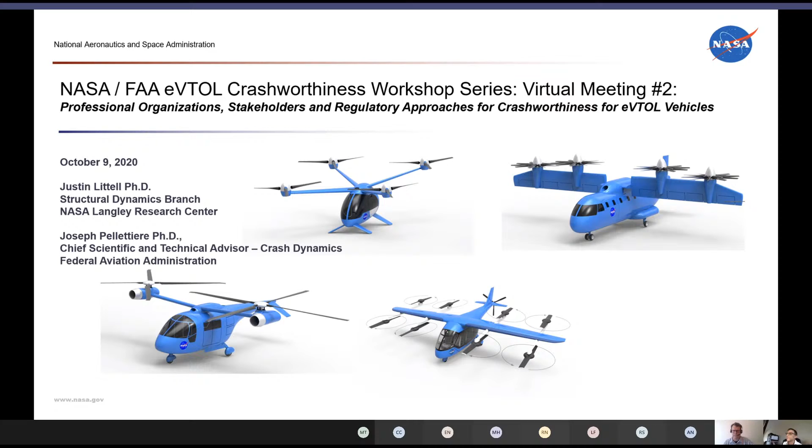As I mentioned, this is the second in a series of workshops. The first one, back in April, provided some of the historical basis for crashworthiness and some of the overall regulatory considerations we were looking at. This installment will review crashworthiness from the perspective of professional organizations and stakeholders, and also provide information on the regulatory approaches as they pertain to certification efforts with regard to crashworthiness for both the FAA and EASA.

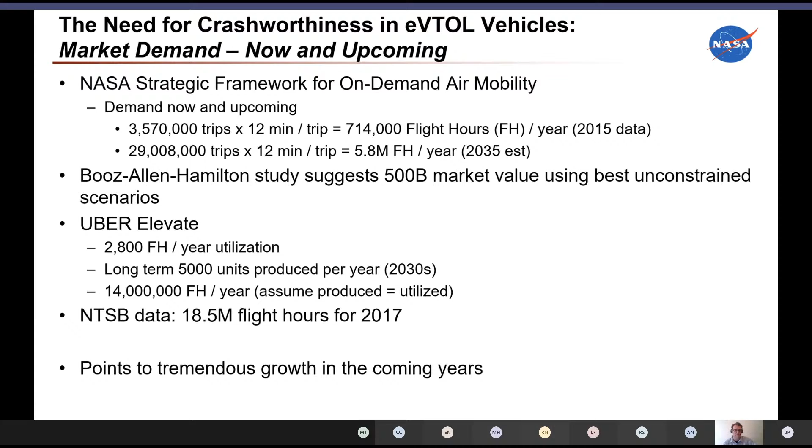And then using some equivalent transport aircraft data, there's 18.5 million flight hours for 2017. So all this boils down to the fact that there's tremendous growth in these vehicles in the upcoming years, and we're just at the start of it.

And then finally, I want to talk about public perception. This is a study that NASA Crown Consulting conducted for NASA. Basically, it boils down to the fact that there are 5 major concerns, and safety is one of those 5. There's a text that says consumers cite proven safety records and demonstration as factors that would most increase their level of comfort. So knowing the performance of these vehicles under normal operations and also emergency operations is very high on the consumer focus here.

So there's 3 strategies that Crown suggests for public acceptance. One is technology, so establish the safety standards, focus on noise, which is not our topic today, but safety systems is. Unified messaging, that's addressing public concerns and emphasizing benefits, and then proactive engagement with concerned groups. So these bottom 2 are a little bit of what we're trying to reach out today and focus on.

And then finally, I'll just show an example, a more recent example. This was presented at the VFS Forum actually this year. This is the NASA Lift Plus Cruise concept vehicle. There's 2 configurations of it. One is sort of a baseline non-energy absorbing configuration.

What we found is we have an occupant model in there. We ran a 30 foot per second vertical case, just like the drop test I showed above.

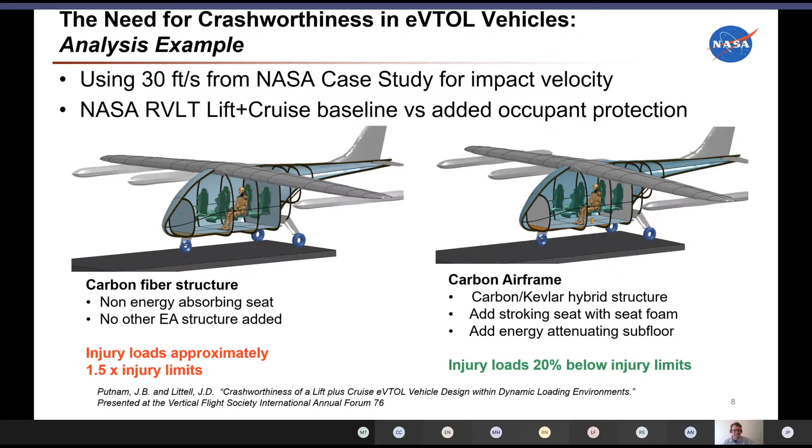So a very quick overview of why we're doing this today. Joseph, back to you.

Thank you, Justin. So a question that comes up is, in crashworthiness, why now? What I'd like to say is that a lot of these vehicles, we're projecting forward, so they're early in the development cycle. If you can get on the ground floor and start incorporating crashworthiness features, energy absorption, the space, the technologies that are needed, that will pay great dividends in the future because these airframes are likely to remain around for a long time.

The other thing is, as Justin was showing, when you look out in the future at the number of flight hours that are projected, you could go from that and say we're going to have some emergency landings, some incidents and things of that nature. So we have to expect that there are going to be some sort of outcomes that we're going to need to protect the occupants from to ensure continued growth and acceptance.

It also hits one of the Crown features, which is getting the safety message out there, getting the public perception that these are safe vehicles, that they can maintain safe passage from point A to point B to ensure that continued growth.

The other aspect is right now the current regulatory framework is really based upon other designs. So we've borrowed the framework from other classes of aircraft, and we've had to sort of modify and mold them in place in order to kind of achieve the project basis and move forward now. As we begin to learn more about how they operate, the failure modes and things of that nature, we may have to change and modify some of those regulations and means of compliance.

So as mentioned, we're an international professional society working to advance vertical flight, founded in 1943 as the American Helicopter Society, but our mission has always been all kinds of vertical flight aircraft around the world, manned, unmanned, everything. We're an educational nonprofit, so our whole purpose is education and expanding our knowledge and providing resources for developers in industry, academia, and government, and moving forward to realize these advancements, not just in technology, but in adoption as well.

We're a membership society, so everyone in industry, academia, and government is eligible to join VFS. As mentioned, we were originally founded as the American Helicopter Society during World War II, when most development was in high-speed, long-range fighters and bombers, while this technology could barely get a person, maybe 2 people, off the ground, very limited in payload, range, and endurance. But the people developing the technologies, industry, academia, and government, needed to come together to help support this advancement.

Similarly, we saw this coming in the 2013 timeframe. We held the world's first workshop on eVTOL. You can see some of the leaders today in eVTOL were at that first group. We found a room that held 100, and we sold out pretty quickly. And we've been working ever since to try and lead and collaborate in advanced eVTOL technology.

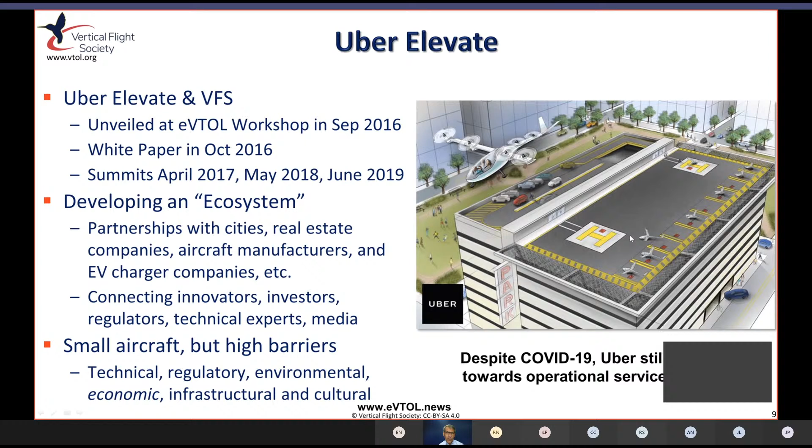Uber was planning to do some demonstrations, air taxi demonstrations later this year. I'm not sure that they're still on track for that, but they are saying they are still on track for certification and operational service in 2023. So we know when the eVTOL revolution is going to happen. We need to do everything we can to help realize this great future that we see.

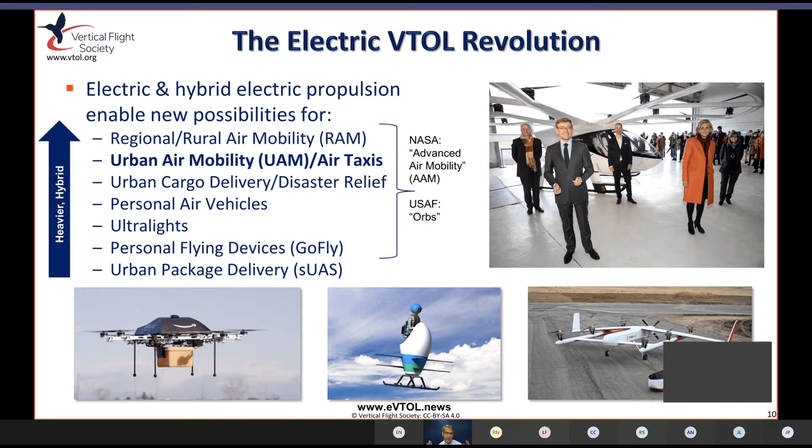I mentioned urban air mobility. That's just one slice of it. There's a whole range from package delivery, personal flying devices, cargo, larger cargo, and then urban air mobility and air taxis. There's also regional or rural air mobility. All of these are now grouped under this broader term of advanced air mobility, or the Air Force had to come up with their own term, for Agility Prime, they're calling them ORBs, but not a really great definition. And yesterday, one of the representatives from NRC Canada, National Research Council of Canada, said they've actually got IAM, integrated air mobility. So we need more acronyms I guess, but let's just look at the technology, which is the eVTOL.

And it's important to understand this isn't just electric helicopters. Helicopters are phenomenal at hovering, and with a very large disk area they're well suited to hovering. But when you want to take that horizontally rotating rotor and translate it for forward flight, that requires a lot of mechanical claptrap and a fair amount of complexity, which is cost, weight, and maintenance requirements.

But that didn't eliminate the complexity of the rotor system, and that's really the key way to get some of the advantage - to replace this costly, expensive, complex single rotor system with multiple simple thrusters. So most eVTOL aircraft use propellers. Sometimes they call them rotors, like multi-rotors, but they're not rotors, they're propellers, fixed pitch propellers. They can get off the ground and then get on a wing for efficiency. So a large diameter rotor or propulsor thruster is going to be most efficient for hover. They sacrifice that by having smaller diameter propellers, but then get on a wing for best efficiency.

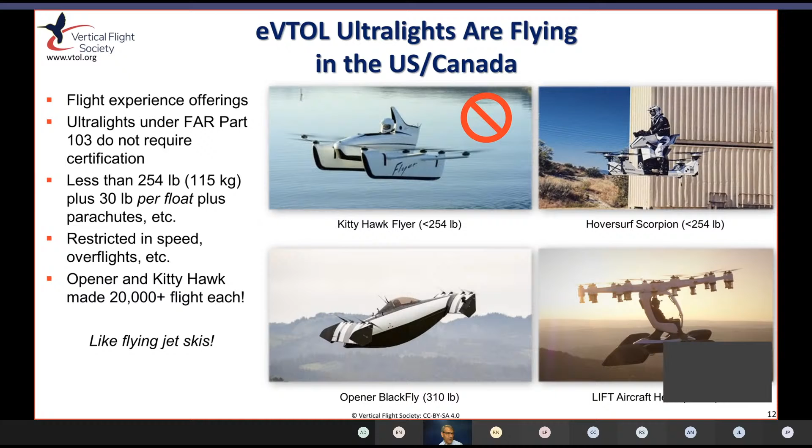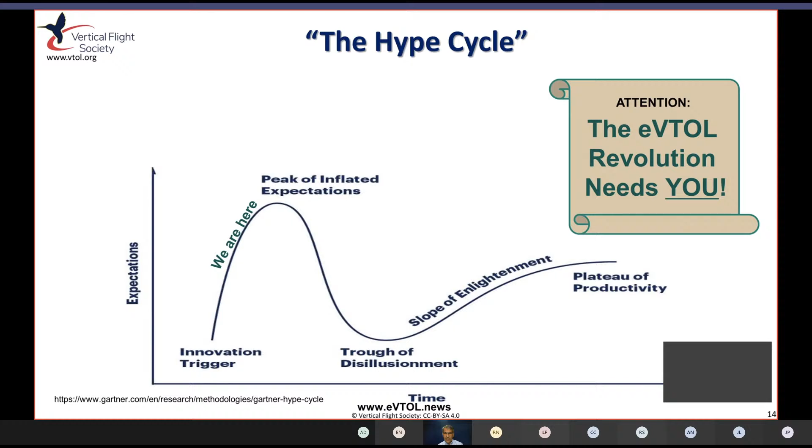So eVTOL aircraft are flying, but part of that - the fact that you can take a relatively small aircraft, put some electric motors and batteries on there, and get it off the ground - has really led to this what's called the Gartner hype cycle, where there's this huge peak, this hype. People are almost hysterical about the potential for eVTOL, and we're still going up this peak of inflated expectations. But now we've been trying to get people to understand that it's much more difficult to develop an aircraft than just putting motors on it. There's the safety, there's operational range, there's all kinds of requirements or considerations people need to remember. And so we're trying to inform everybody, trying to educate everybody and bring everybody together so they can solve a lot of these problems.

Well, you have to understand where we are in the development. Otto Lilienthal said to invent an aircraft isn't really anything. To build one is something, but to make it fly is everything. But it's easy to design an aircraft if you don't know how. The most important thing is to actually come to an aircraft that's in production and operation and is making money or meeting the needs of the user.

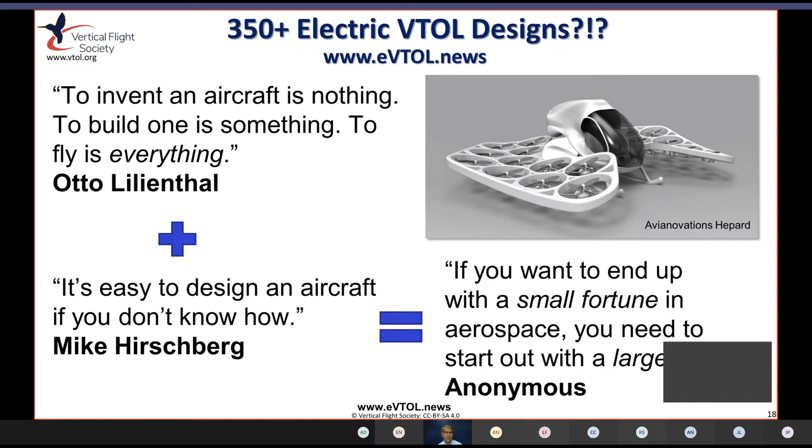People know it's a maxim of the aerospace industry that if you want to end up with a small fortune, you need to start out with a large fortune. Luckily, with the dot-com boom and other things, there has been a lot of money available for venture capital and ventures.

But ultimately, it'll be successful if you can make money with these aircraft, both in sales and operations. So low direct operating costs and seat mile costs is really the key result that you want to have.

I mentioned before, noise is a key enabler. So with eVTOL aircraft, there's real potential for a step change in utilization through cost, noise, emissions, and other factors. So where are we today?

If you're coming from the helicopter world and know some of the history, it was a long time after people got off the ground before the helicopter was actually able to do something useful, in the 1930s. They had some limited abilities in the 30s, but really the 40s and 50s, and maybe in the 1960s or so, they were really pretty useful, especially with the first turbine engine helicopters.

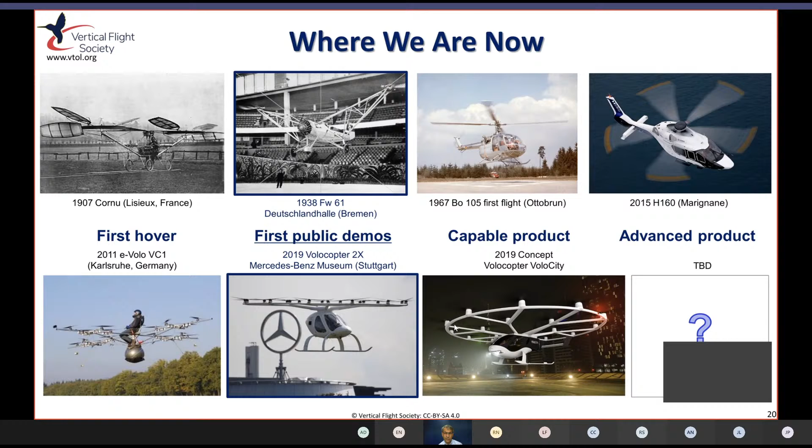So we see 5 key challenges for eVTOL aircraft for urban air mobility operations. Batteries, motors, the actual technology for the larger sizes here of 4 passengers plus a pilot, that's kind of at the ragged edge of what technology is able to do today, and also still keep the noise down.

The infrastructure needs to be developed. Luckily, or thankfully, NASA and FAA have been working on the air traffic management solutions for UAVs and UAM. So UTM systems are being developed, which will be able to handle thousands of aircraft. Still a long way to go, but work is underway.

There's a physical infrastructure. You see here a Skyport concept for Uber Elevate that Gannett Fleming, one of our members, developed. So there's all kinds of different ways or visions for the best way to maximize throughput, and that means more benefit for us as consumers, that we'll be able to take air taxis when and where we need it and get there faster than if we had to take another available means of transportation.

Standards and regulations are key. These are in development, and that's a little bit of what we're talking about today with the other organizations. I'll touch on that a little bit more in a minute.

And again, safety, noise, not-in-my-backyard concerns, even if they're really quiet, there's air pollution or visual pollution of hundreds of aircraft taking off over my house or past my apartment. That's also something to consider. And if it's seen as a benefit where anybody can take it, not just something for the rich, then that'll help with public acceptance.

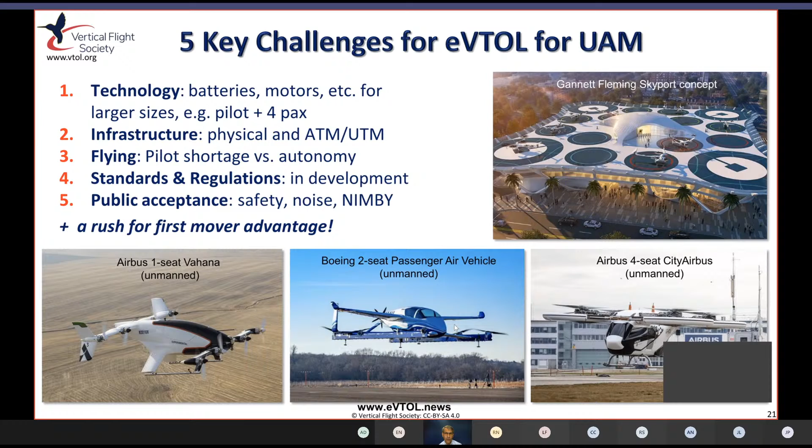Of course, we know that all these challenges could be solved with enough time and resources, but there is a rush, I'll say a rush. There is a push for first mover advantage, to be able to get the best return on investment for the development of these aircraft and development of the whole ecosystem.

So crashworthiness - NASA has a couple projects. There's the Revolutionary Vertical Lift Technology project, which used to be the rotorcraft project, that's really pivoted now to better support eVTOL and UAM. It's focused primarily on vehicle technology, so CFD and understanding the technologies for the aircraft. The Advanced Air Mobility project is working more on the operational challenges - that's roughly where they are.

It's important to realize that airplanes crash horizontally, while VTOL aircraft like rotorcraft crash vertically. Look at some of the designs - these are just notional designs Uber came up with - but they're most likely to be unitized composite structures with lots of battery mass and distributed electric motor masses. Nothing like this has really flown before.

On the bottom right, it shows the first testing that NASA, the Army, and industry did of composite rotorcraft, back in the late 70s or early 80s. This was a new type of vehicle, and it needed to be tested so people could understand how to enable those.

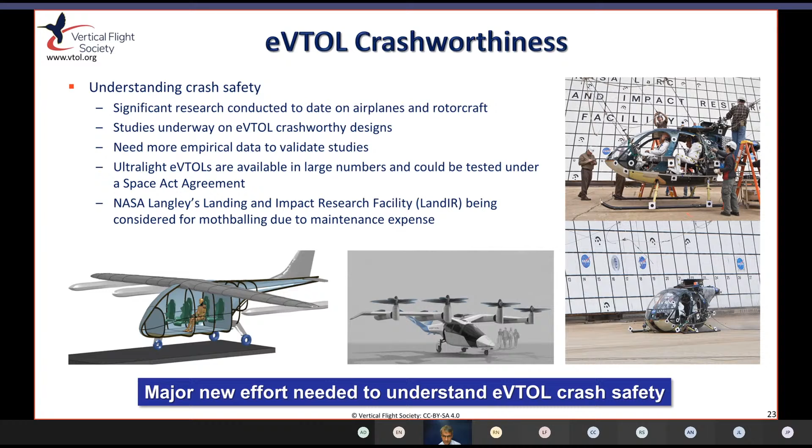So this session today is talking about professional societies. We started something over a year ago now called the Air Mobility Council - we brought together 10 or 12 different organizations. It's just an informal discussion group really, to try and coordinate and collaborate, also working with standards development organizations like ASTM International and SAE International. We need the technical experts, the developers, to get involved with GAMA, with these different associations, with the standards development organizations, to figure out what the requirements are and what the certification and standards should be.

In our discussion yesterday, Mark Moore from Uber said if there's one thing he could do to get the professionals involved more, it's to work with the standards development organizations and the associations to develop these standards. We need you, the industry, and academia, and everyone to get together to advance this.

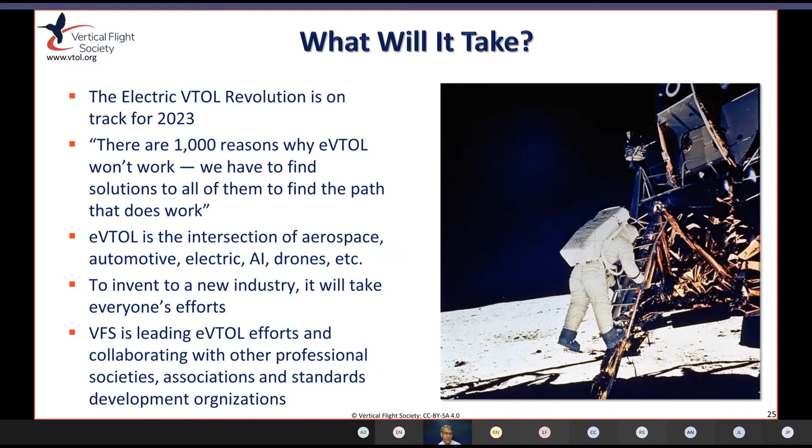So in summary, the eVTOL revolution we think is on track for 2023. I've been saying for a long time there's 1,000 reasons why eVTOL won't work. We have to find solutions to all of them to find the path that does work to realize this vision of air mobility that we think is possible, and it's coming. Just a matter of when, not if. But we can accelerate it and have a much smoother transition if we all work together. So we all need to work and try to invent this new industry.

They've heard the expression it takes a village. Well, it takes a lot more than that. It's going to take society. It's going to take everybody from all walks of life around the world. It's going to take your help in making that happen.

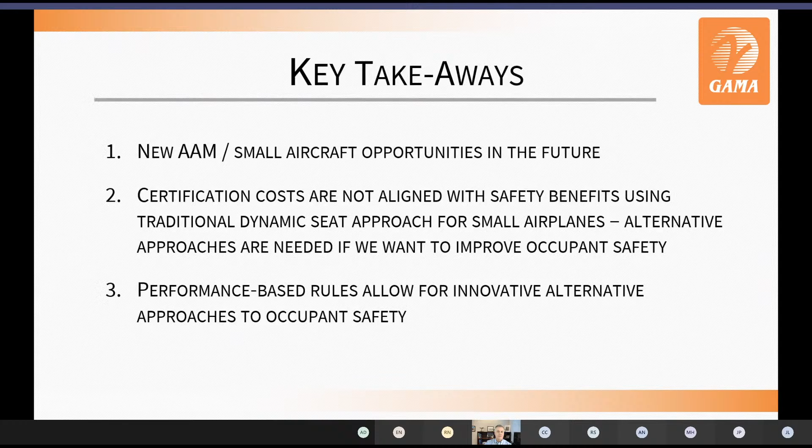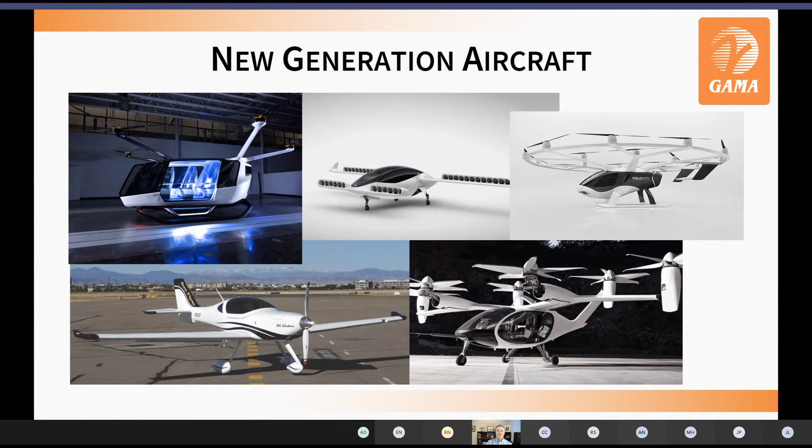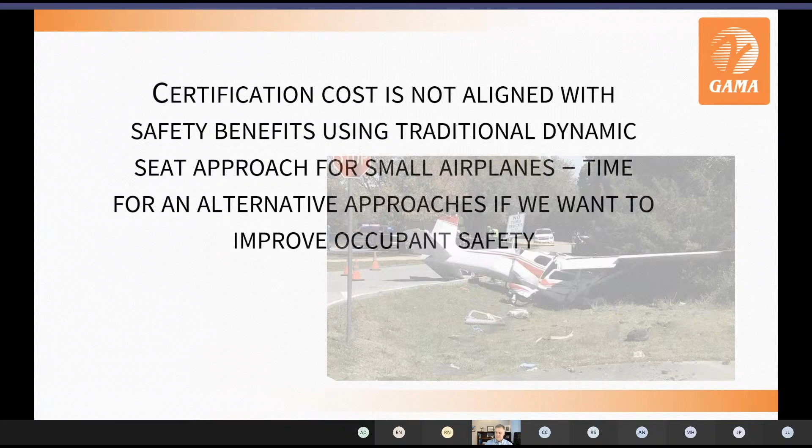So moving on, let's talk a little bit about certification cost and how it doesn't really align well with the safety benefits when we're talking about the traditional dynamic seat approach, and the need for thinking a little bit broader and more innovative and looking at alternative approaches if we really want to improve occupant safety, which we do. If you look in the background, this accident kind of sums up one of the big problems with small aircraft, in that they just don't have the consistency in terms of accidents that we see in larger aircraft. The NASA testing is wonderful, but it doesn't capture all the problems, and I'll talk about that in a bit. I think there is some weight, inertia break point where below it, we could say 4,000 pounds, just kind of as something to wrap your head around.

When we talk about accident scenarios, you look at biz jets, transports, helicopters, they tend to be fairly consistent. As you get smaller, especially with single engine vehicles, you don't see the consistency in the accident scenarios. And the reason that's important, when we talk low weight inertia, light wing loadings, light disc loadings, the very specific dynamic testing scenarios don't line up with the accident service history. I would project that eVTOL aircraft may have the same variation in accidents, maybe a little less, because they have, or they're going to have, more redundancy with the propulsion systems, which is excellent, but they may be operating over more challenging environments and more challenging weather conditions.

So one of the reasons that I bring up dynamic seats is because it's the most expensive component in a small airplane today, next to the engine and avionics. Years ago, when I was at Mooney, that seat and passing the test cost more than an entire STC for a new engine, new gross weight, expanded fuel tanks, new instrument panel, better performance. I mean, it was a substantial STC, and the seat cost more than the rest of the whole entire STC. It's something that we really have to have a conversation about.

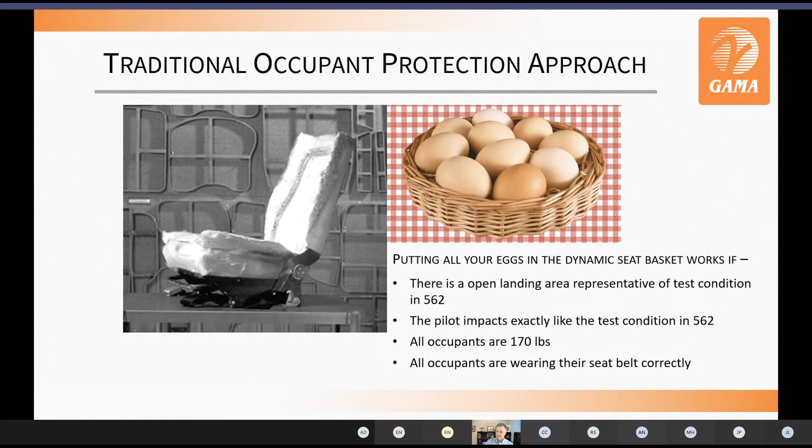So before we move on, I would just like to point out that whole thing about putting all your eggs in one basket. If that is a very expensive test, it kind of drives our manufacturers to where they're going to be reluctant to look at doing additional safety things for no credit, because that's extra cost and weight. So we have to figure out how to spread that out.

So it goes beyond a typical rule, very, very precise, and that drives cost. So when I talk about performance-based rules, that's kind of a top-level flexibility that's allowed in 23-64. These are the new emergency conditions, as we call them. You'll notice that this doesn't tell you how to design and test the seat, what it does is it defines the intended safety outcome. And that's the intent. Now maybe you can get to this intended safety outcome in a lot of different ways, probably leveraging off the dynamic seat concept, but maybe now you're allowed to get credit for doing some other things that could really enhance occupant protection.

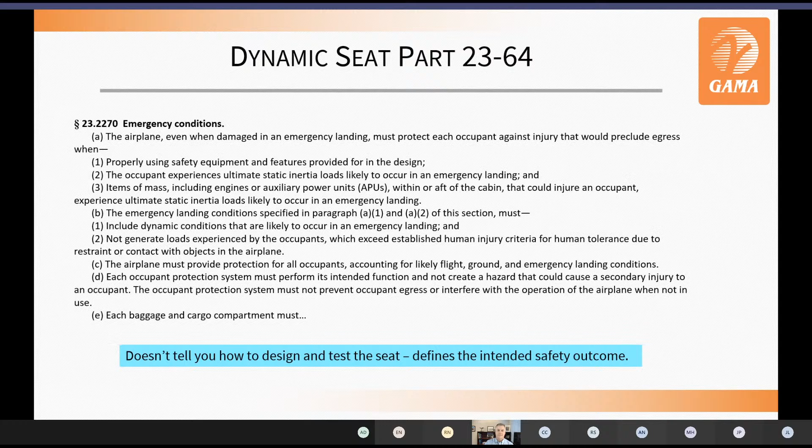So what's that available on? Obviously CS23 and Part 23, but I would also offer that EASA's eVTOL, which leveraged CS23, has the same language and leverages that. I think they bias it towards Part 27. The FAA is taking the same path for these vehicles with Part 23, and I think they're using very similar language, if not the same language.

Fortunately, we're not locked in to those prescriptive requirements anymore, but applicants are going to have to propose this. I'm hoping that the authorities will work with our industry and kind of come up with some credit for doing different things, maybe look at modeling, more credit for modeling, and a mix of tests and that.

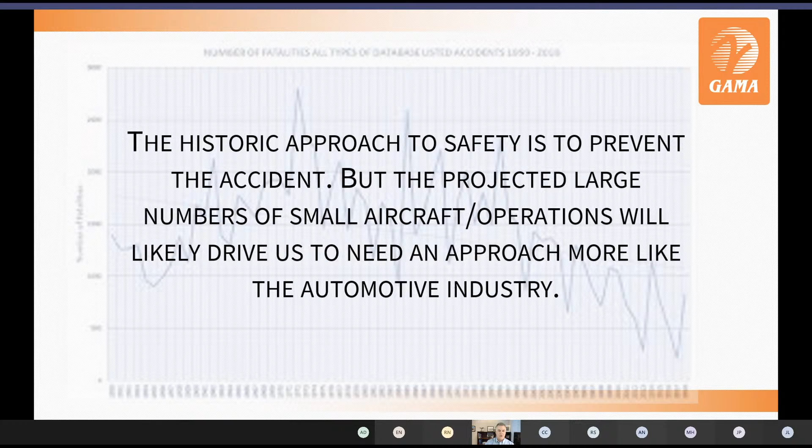That said, as Justin showed you in the first set of slides, the numbers of aircraft and the numbers of operations we're talking about pretty much ensure that we're going to have accidents. There's just no way around it. History says it'll happen. So how do we address that and keep the public interested for this urban air market that we're really excited about? I'd offer that maybe we need to start thinking more about this from an automotive standpoint, meaning accounting for the fact that accident scenarios will have a lot of variation.

Since it's unrealistic to count on just preventing the accident, what we need to do is accept and expect that we will have some. And the key point I really want to highlight is that we need to start thinking about this more from the automotive industry, where the goal is to protect the occupant and allow them to walk away from accidents. People aren't afraid of driving anymore because there are so many accidents that might have been fatal a decade or two ago where people just shake it off and walk away.

Furthermore, you look at what folks like Simpson Racing have done for Formula One and NASCAR, and the accidents that the drivers are walking away from. It's just phenomenal, the technology that's out there today for occupant protection. And while we recognize there are weight issues, and in F1 there are just what they wear, and other issues with racing that aren't practical for us, I think some of the technology and concepts are things that we can use.

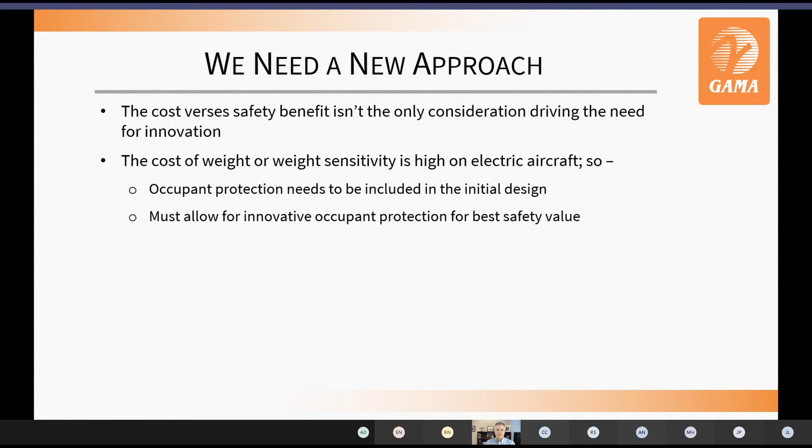Just from a practical standpoint, one way to address that is to try to build this stuff in during the initial design phase. And with that comes early discussion with the authorities so manufacturers know they're going to get credit. We have to all be on the same page when we're going down the path. The second point is that when you're doing something innovative, it needs to balance out with that safety value, and I want to share a few practical considerations.

We're talking about moving a lot of people through fast because the target is urban air, like an air taxi. That's probably where we're going to see most of this. Advanced air mobility excites me for some of the long runs, but the short hops will happen fast.

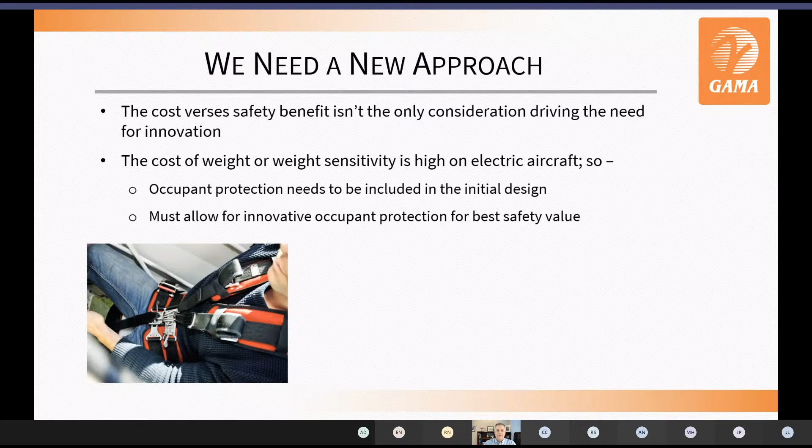One of the aircraft I fly is aerobatic, and because of that I have a harness like this. It's an awesome harness, and I feel like if I hit the ground and the steel roll cage holds, that harness is going to keep me alive, and I'm not going anywhere. The trouble is I have to plan about 5 minutes to get into that thing. Moreover, if I take anybody flying in it, I literally have to do the seatbelt for them because it's too complex.

The other aircraft I fly has a traditional car seatbelt with an inflatable restraint or an airbag. This one is awesome in the sense that people can get in, they know how to do it, it's very easy, and they're very comfortable with it, used to it. The downside is it may not give you the protection you need in a weird accident. There's nothing to keep you from submarining under that, for example.

And now for a little bit of technical humor. In the US, we have an amusement park in Ohio called Cedar Point. It's one of the best roller coaster parks in the country. I love going there. While I'm standing in line watching people who don't know anything about the ride, don't have any experience technically, get on, pull that thing down, go upside down, and then they're off. They're moving people through so fast.

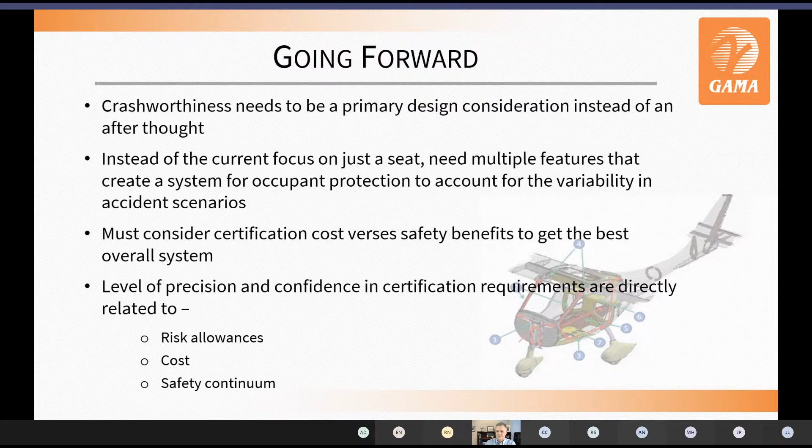So that's all I have, Justin. I'll turn it back to you.

Thanks, Lowell. Yeah, great presentation here. There are a handful of questions on the Conference.io app, and I'm going to go through a few of them. The first, and I think you've touched on it already, is: what do you think are the most important features for eVTOL companies to incorporate in their aircraft? And the sense I was getting from your presentation is all of them, but I'll let you comment further.

So I think when you say all of them, you're pretty close. Most likely, you're going to see more vertical impacts. So I don't want to discount the energy absorbing seat, but I can really envision other types of impacts where you may hit something. And that's what we see today, right? Rollovers, side impacts. That's where you may be able to leverage airbags.

I know if I ball up my car, the whole thing becomes a cocoon of airbags. Now that's probably, from a weight standpoint, impractical, but maybe there's something a little milder you could consider. A better harness system, something people are willing to put on. I mean, those three things are going to get a lot, 90%. There are a few other features from the racing car industry you might look at.

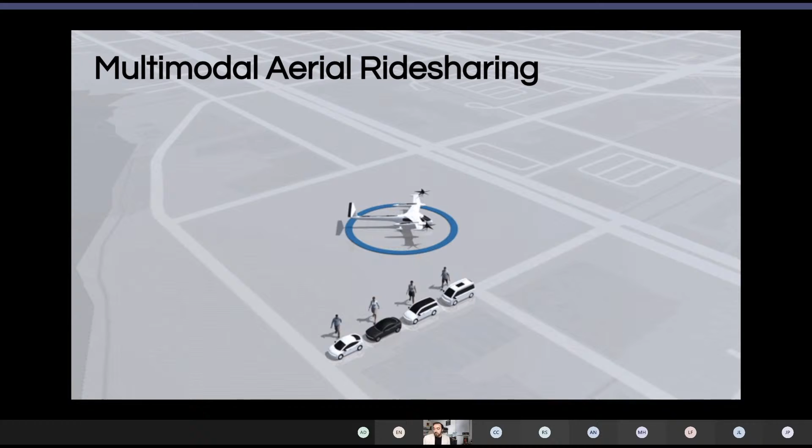So I'm going to go to what is Uber Elevate. Uber Air will be an on-demand aerial ride-sharing service. On-demand means that a ride request can be made in real time without prior booking. The Uber Air concept and technology that enables this on-demand service will be leveraged from Uber's ground mobility services. The term aerial ride sharing means that each Uber Air ride will be shared or pooled at the origin of the flight leg. There's 5 major steps to a multimodal aerial ride sharing experience.

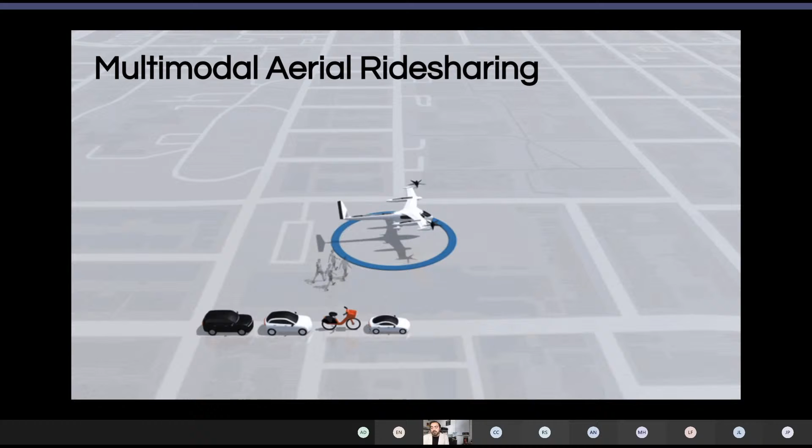We have the first mile, so this will be either in UberX, perhaps a new mobility solution like a shared bicycle or scooter, origin skyport operation, the flight segment, the destination skyport operation, and then the last mile. You're seeing these segments displayed for you on the screen.

As you may know, our rider analytics and simulation tools really provide Uber Elevate a unique ability to provide deep insight into how people move throughout cities. And as a result, we're able to set appropriate vehicle requirements for vehicles operating on our network.

As you see on your screen, this means we need an aircraft that can fly at 150 miles an hour, with 4 passengers and 1 pilot in terms of payload, as well as their associated baggage. A range of 60 miles at least at maximum range, but a typical mission may be around 25 miles. They need to be quiet, at least 15 decibels below stage 3 limits for existing aircraft.

And they need to be electric. We really believe that, in terms of zero emission and minimum infrastructure requirements, we really don't want to be managing fuel. We really think that all-electric eVTOL aircraft are the right solution for this mission. We think these aircraft are going to fly a lot, and they need to be reliable, and need to be able to complete somewhere around 2,000 flight hours a year.

Today, Uber has 8 OEM partners developing eVTOL aircraft for our aerial ride-sharing mission. All aircraft that meet our operational specifications have a wing, and will, throughout most of their operational flight time, be under wing-borne lift, like a GA aircraft. In many ways, it's often more appropriate to consider these normal category airplanes with a VTOL capability. As Joby recently described their aircraft in Aviation Week, it's more akin to a high-efficiency glider in cruise.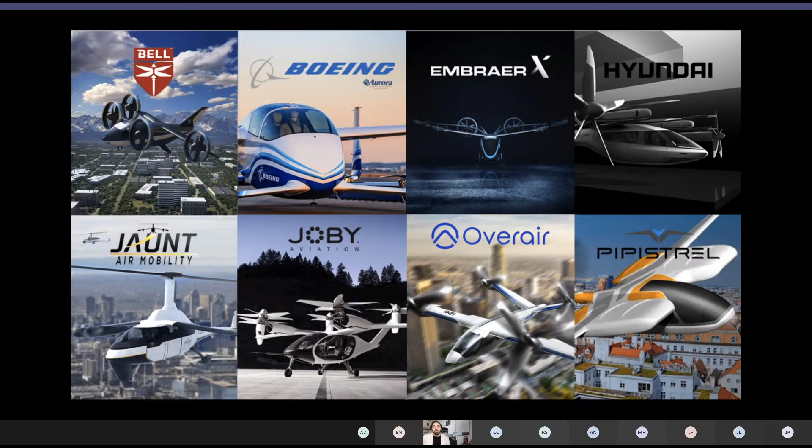Wing-borne features and crashworthiness are somewhat well understood and well documented in AGATE studies, NASA and FAA technical reports. So today I really want to contextualize the VTOL takeoff and landing environment, which perhaps is going to be unique for these vehicles.

When we talk about crashworthiness, it's going to be critical to contextualize the vehicle and its expected operational environment. Uber is in a unique position to help inform infrastructure design standards and other aspects of the system necessary to support these new technologies through our ongoing collaborative research and development work with our OEM partners, FAA, NASA, and others.

With infrastructure, we anticipate that existing airport and heliport design standards may be adequate for many eVTOL operations, supplemented as appropriate with engineering briefs or other interim guidance to support modifications for supporting systems necessary for battery charging, stationary energy storage, and fire protection.

We definitely believe it's a critical time for regulators responsible for infrastructure standards to closely interface with certification projects to best capture and utilize relevant flight test data. And I think this has impacts for crashworthiness as well.

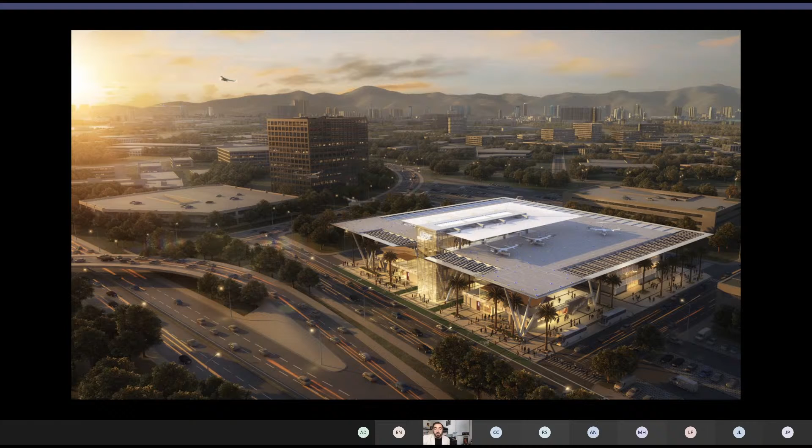I'd now like to pivot to some thoughts about typical rotorcraft performance and flight profiles into and out of heliport facilities. And then I'll discuss why eVTOL aircraft, particularly ones designed to Uber specifications, should potentially be thought about in a more specific way, and what we should expect from the approach and departure of these aircraft.

Okay, so let's go into ordinary rotorcraft right now. We have here the height speed envelope as required by 27.87. The height speed envelope is normally referred to as an HV diagram as well. It defines the envelope of airspeed and height above the ground from which a safe power-off or one-engine-inoperative landing cannot be made.

The diagram normally consists of 3 portions: the low speed portion, the takeoff portion, and the high speed portion, all indicated on that diagram. The high speed portion is sometimes omitted when it's shown that the rotorcraft can suffer engine failure at low altitude and high speed and make successful landings or climbs on the remaining engines. The same is true for the takeoff portion, but we'll get to that in a minute.

The avoid areas of the HV diagram are separated by the takeoff corridor. This corridor should be wide enough to permit a takeoff flight path clear of the HV diagram using normal pilot skill. The takeoff corridor should always permit a minimum of plus or minus 5 knots clearance from those critical portions of these limiting envelopes. Although helicopters are not restricted from conducting maneuvers that place them in the shaded area of the HV diagram, it's important for pilots to understand that operating in those shaded areas exposes the pilot, aircraft, and passengers to certain hazards should there be some sort of engine or propulsion malfunction.

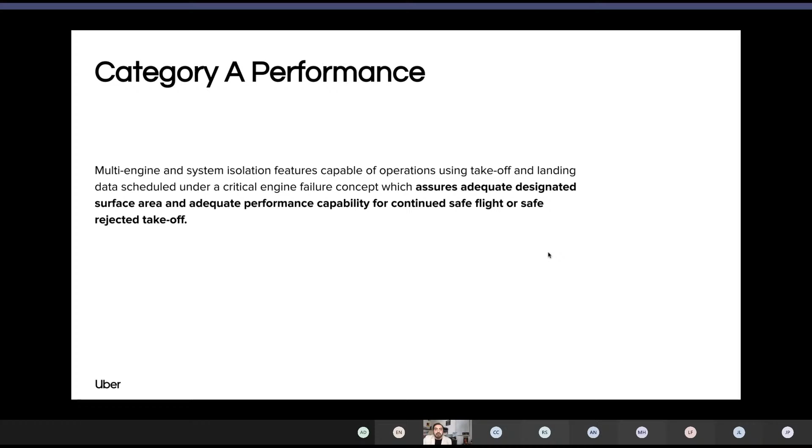Getting more specific, particularly to certain Part 27 and many Part 29 rotorcraft, we understand Category A performance requirements. In short, this assures there's adequate designated surface area and performance capability for continued safe flight or a safe rejected takeoff. Category A performance imparts requirements both on the vehicle design and on vehicle operation.

For expediency here, I'm going to skip forward. But operationally, this vehicle is flown in a way that if there is a single engine inoperative, it's either able to continue safe flight or land in a particular way.

There are other types of Category A takeoffs as well. The left diagram is from a ground heliport, the right from a pinnacle heliport, perhaps from a building. Here you can see that a minimum takeoff distance of 0 feet can be achieved through the use of a vertical takeoff, and the following figures show those two representations.

It's really important in this procedure that a safe landing is possible from any point up to that CDP, the critical decision point. It's that node just after the vertical climb.

So what typically happens is, in order to enable this kind of departure, we sometimes take weight penalties in terms of our total max payload on takeoff, to allow that HV diagram to collapse and allow for that vertical takeoff. Now, this is not necessarily the greatest situation, and with vehicles like eVTOL that are quite payload constrained, we have to be thinking: what's the optimal departure?

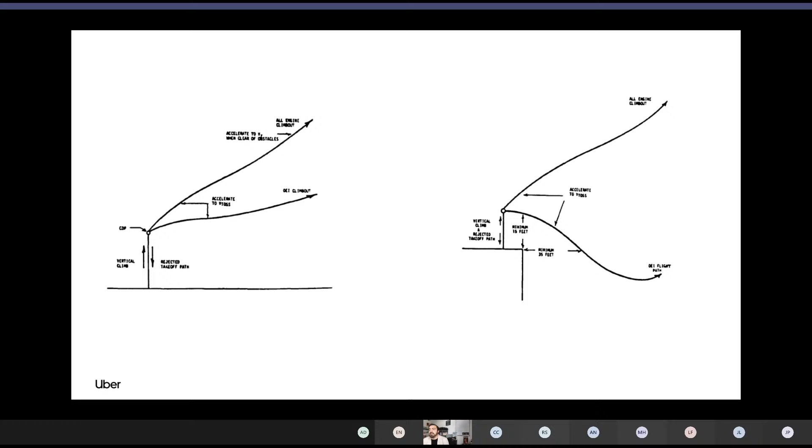Can these vehicles operate safely? I think that the answer really is yes.

So just to hone in on aircraft with limiting HV envelopes, we have horizontal flight profiles similar to the one I showed in the first diagram, and vertical flight profiles in the second two diagrams.

Okay, back to eVTOL. A hallmark of eVTOL technology is redundant distributed electric propulsion. We see that some aircraft meeting the Uber Elevate specifications can sustain continued safe flight after the complete failure of a single propulsion element, and that the need to develop translational lift is no longer a typical requirement for a safe departure.

It should also be reiterated that these vehicles are expected to spend very small amounts of time in hover, both for power and acoustic reasons. These are not helicopters, and they are not designed for long duration hovers or low speed operations close to the ground. They're meant to lift off, depart, fly and cruise, and get to their destination.

So what might this mean? Well, if you look at the modified HV envelope, as you see on the left, you can essentially do that departure, or a direct ascent departure. We see that some rotorcraft are capable of doing that today.

The AS355, for example, has two different types of departures listed in their AFM. They can do the vertical departure if they take that weight penalty, or they can do some type of translational lift departure.

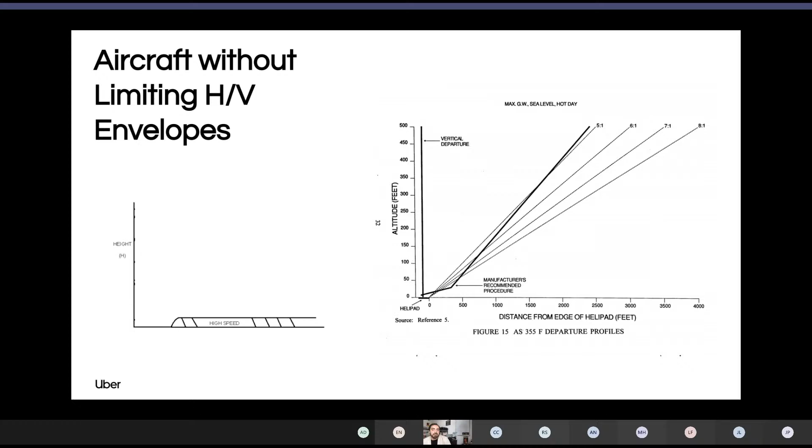What I really want to get back to with distributed electric propulsion is that the single element loss of a propulsion unit is not going to be as critical as, for example, a twin engine rotorcraft, which may now have lost up to half of its available power. So we really do expect that the vehicles operating on our network will be able to fly more direct flight profiles and quickly get onto the wing and fly and cruise.

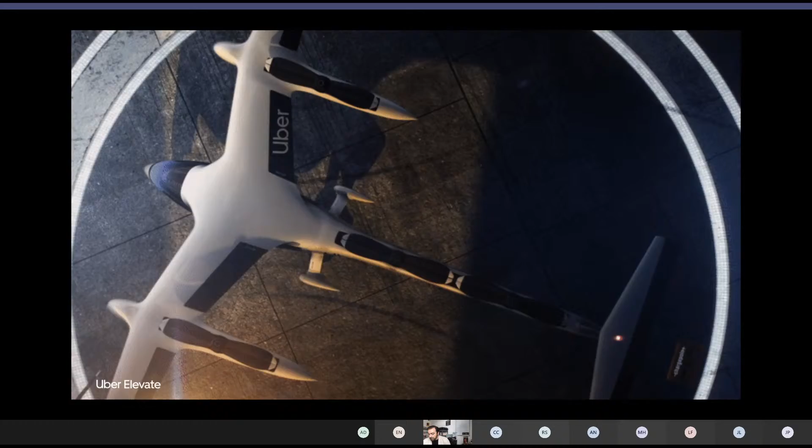I have some concluding thoughts. eVTOL are in the certification pipeline today, and their certification bases are very well along. I think it's really important that, as first movers pave the way for future efforts, industry works to help these first movers find their success. Their success is going to be our success. I think events like this are very important, such that we really set a strong foundation for this industry.

I think there's a few interesting concepts I'd like this community to consider, specifically with respect to unique capabilities and considerations for eVTOL. The first is perhaps to consider optimal trajectories for crashworthiness, in terms of both speed and climb angle, such that there's an optimal flight path for emergencies. I think we are in a really unique stage with very capable vehicles, and we can start thinking about optimizing for other types of points when it comes to departures and arrivals, and crashworthiness may be one of them.

Going back to that, it's not just speed and climb angle, but perhaps the optimal flight path over particular areas. Maybe it's beneficial to fly over a highway instead of buildings on initial climb, things like that. I think it would be interesting to understand the implications of that.

The second is with respect to automation. Automation will, in large part, fly these aircraft. They will adjust their deck angles, not the pilot. The pilot's going to be requesting a rate and direction of movement from these aircraft, up, down, left, right, and how fast. The aircraft will respond as appropriate to deliver that request.

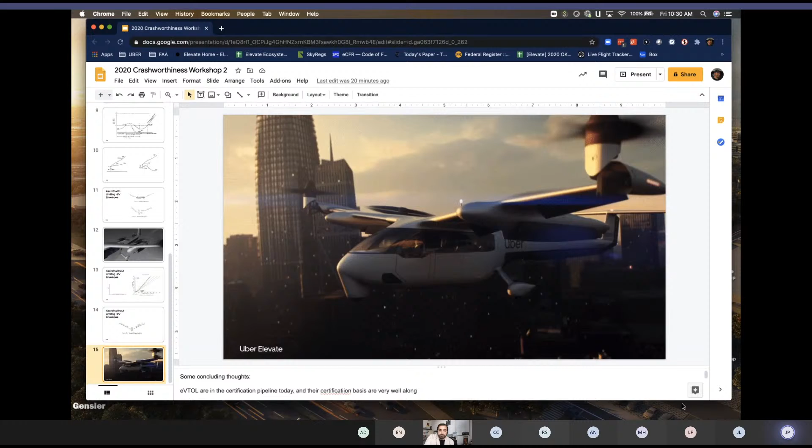Oh, thank you, Ryan. I got a question. I know you probably addressed some of this in your talk, but assuming the operations that you have, do you see any limiting factors from crashworthiness that would maybe affect how you might operate or fly, or what types of vehicles you guys would be looking at?

I think it's really important to reiterate that any vehicle operating on the Uber Elevate network will be a certified aircraft. With respect to crashworthiness, they will meet all requirements as required by CAAs and meet those needs, so we wouldn't compromise on safety there. We're definitely going to take certified aircraft. In terms of whether we're going to operate in a specific way with respect to crashworthiness, I think there are a lot of opportunities with respect to automation and how we can ideally fly these aircraft such that they encounter a crash situation in the best possible way. I know this is a very new concept, and I'm really excited for where research could go with that.

Thank you. I guess we have no further questions at this time. And actually, we are— oh wait, I guess someone just put in a question here.

It's on autonomy. It says, in the future, how do you derive sufficient confidence in the autonomous capability to no longer need crash mitigation structures? And also pulling the same thing from the autonomous, when you look at the self-driving crash avoidance features you see in self-driving vehicles, how do you see that maybe being applied to these vehicles so you're bringing that capability in so you're confident with it?

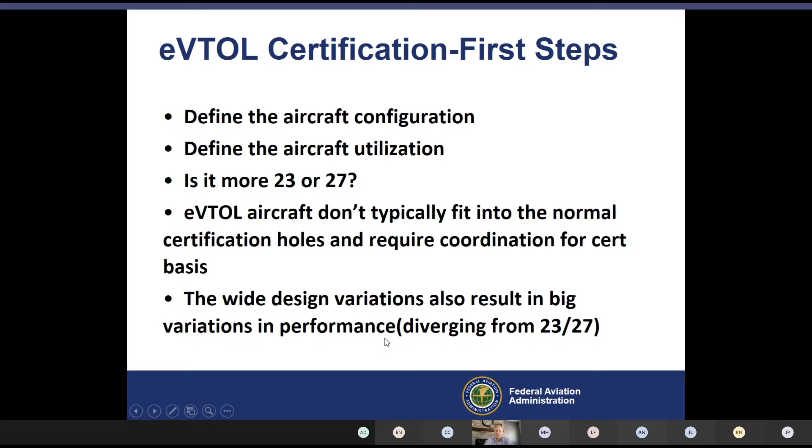As we've discussed earlier, eVTOL just don't seem to fit into the normal certification holes. We're seeing a lot of these vehicles start to come in trying to apply for certification, and we have a real challenge plugging in the right requirements with the wide variation of designs. They are definitely deviating from the traditional 23 and 27. Nothing new there.

So obviously now we're proceeding with the known. We're throwing 23 and 27 static and dynamic crashworthiness at them. That is typically where we're kind of considering how the vehicle flies and lands in an emergency. That's what they're based upon.

We may move towards some sort of Part 27 fuel tank requirements, like a 50-foot drop test maybe - thinking batteries here, this is nothing in stone yet. It's actually dealt with more on the power plant side, but with the congressional mandate on rotorcraft it seems reasonable that we consider how these vehicles, the batteries, deal with impacts, so they're not a post-crash fire hazard.

Again, we are incorporating crashworthiness best practices in the survivable volume. These come out of a lot of the new Part 23 rewrite Amendment 64, where we're giving a little more credit for looking at holistic crashworthiness - occupant restraint, interior protection, how the occupant does inside the airframe. Also airframe load attenuation, anti-plowing features to ride the airplane out of the crater and slow down slowly, post-crash fire protection, and good egress.

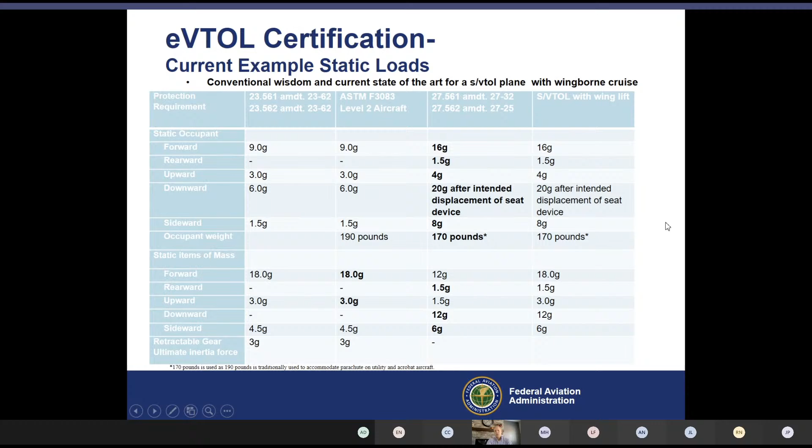So to this point, this is where we are right now with current applicants and our adapted requirements - we've adapted them to eVTOL. But from this point on, this presentation really mixes the known and suggests a plan forward into a better predicted solution for eVTOL crashworthiness, because they are so unique - each one has its own characteristics. So this is not FAA policy, it's not data directly suitable for certification, but these are things that need to be discussed in the future as we start bringing these airplanes online.

So we really need to start with an emergency landing. What is an emergency landing? We bound an emergency landing for Part 23 and 27 as an impact where the aircraft is under control at impact, or at least just before impact. So we're looking at maybe stalling an airplane as you bring it into the ground with a fixed wing, or with rotorcraft - it's really defined by how we can control that impact. If your aircraft's out of control, really all bets are off.

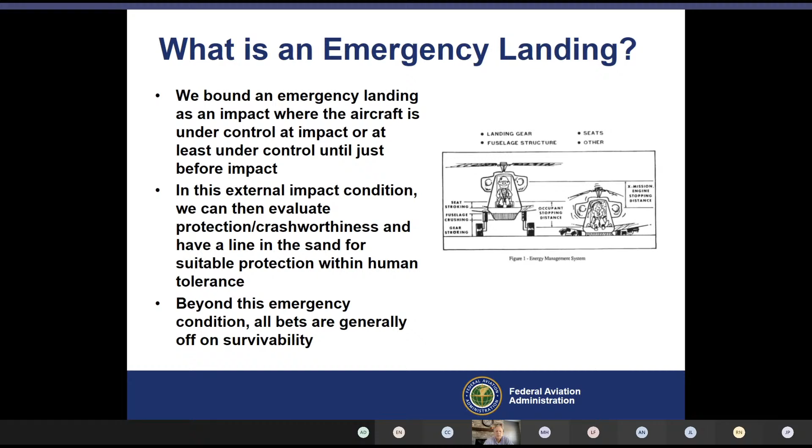In this external condition, we're going to look at crashworthiness, and we really draw a line in the sand based on human tolerance for really two conditions: either a fixed wing 23 crash landing, or a 27 auto rotate. We draw a broad line in the sand for pretty much all of those types of aircraft, and then we build our crashworthiness off of that. But with eVTOL, we've got a lot more variability based upon the aircraft's operation.

So like Lowell discussed earlier, we'd like a vehicle that could handle a lot more spots on this, not just picking two points on a surface of possibilities of impacts. We'd like a vehicle that can handle a lot of different cases, and general is probably better than fine-tuning your vehicle to one occupant weight and a couple of different orientations.

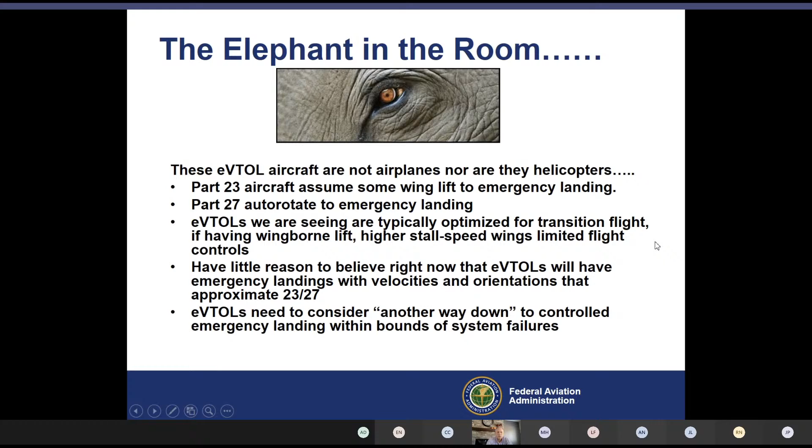So we don't have much reason to believe that emergency landings are going to be like 23 and 27. So again, another way down, a controlled emergency landing. And it's not that you have to come up with a new one, you just have to use the ability your vehicle has. And your vehicles vary so much that it's going to marry system safety into crashworthiness like we really never have before, your failure scenarios all the way to the ground.

So I know Ryan went through a lot of this, he's thought through a lot of this. A good example is what your vehicle can do, what kind of places you need to stay out of, how you can bring the aircraft down, and what your scenarios are, really thinking through these emergency landing parameters.

So obviously we need to define what kind of direction and magnitude of the way a vehicle can come down, so that crashworthiness can really have a fighting chance to do its job. If it's way off the charts and way outside those curves, we can pick something, but we don't really know how applicable it is. It just operates on a different paradigm.

So really, what system you need to figure out is what system redundancy or features are available to your eVTOL in an emergency landing. If it's failed, what can you use? Not saying it's not possible, it's just that eVTOLs need to use the strengths they have.

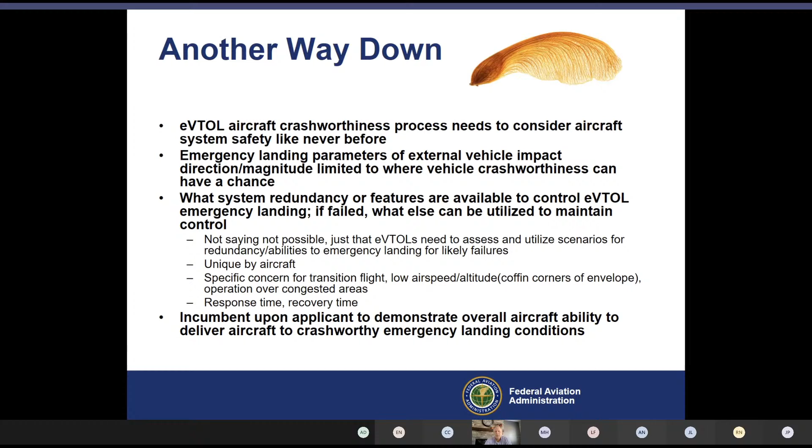So it really is incumbent upon the applicant to demonstrate the aircraft's ability to deliver the aircraft to emergency landing conditions that we can use our crashworthiness on. Really, what we're really after here.

So obviously, how can we control descent? We have residual thrust for multiple rotors, residual thrust coupled with residual lift. These are all things that you've given thought to in your failures, but we're going to be looking at how a failure hazard assessment really can help us here.

We're going to take things that can go wrong and really take them all the way to the ground in scenario. That's what we kind of like to see here to define that emergency landing.

So some of the fixed wing aircraft that we've seen, obviously they're optimized for a different kind of flight, typically maybe a higher speed flight. They're not necessarily given flaps for a slow speed landing. So control redundancy is a part of that failure hazard analysis that we can't really

you need to put flight controls in if you're not going to put or show redundancy for flight controls. Some use differential thrust, differential torque. All of that plays into the functional hazard assessment because just controlling our emergency landing. And again, as mentioned before, how is automation going to affect our emergency landing?

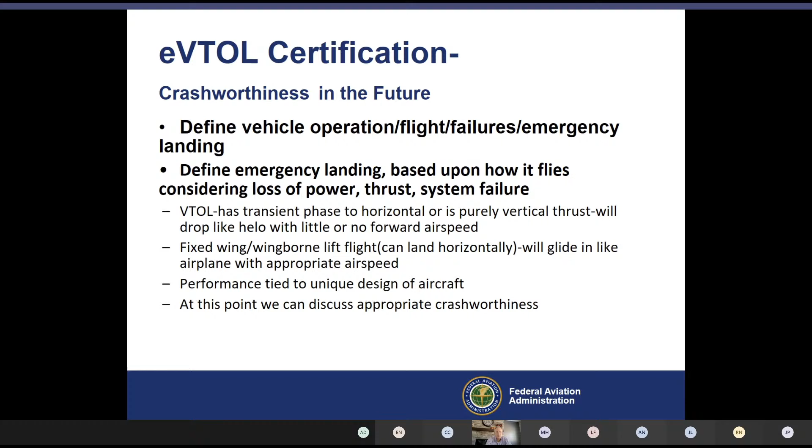So talking about crashworthiness, going forward, how would we use this once we define our emergency landing? Obviously, if you could bring it within existing parameters, we could probably leverage Part 23 and 27 crashworthiness and make it a lot easier for everyone. But if you have something that deviates from the known, where we know our general crashworthiness works, then you really probably need to demonstrate some sort of equivalent occupant survivability.

And again, these don't necessarily correlate directly to 562 and 561 loads, because there's airframe attenuation. But then again, we really don't take credit for it in traditional crashworthiness—airframe attenuation is generally not something well defined in current crashworthiness.

It's just that we have these points that are our targets on charts like this, that way back in the preambles of our rules, we pick these points in space and take this load at a floor and run a seat on it, and we really care from the floor up. We haven't traditionally, beyond dynamic seat testing, really looked at the airframe like we kind of hope to look at going forward.

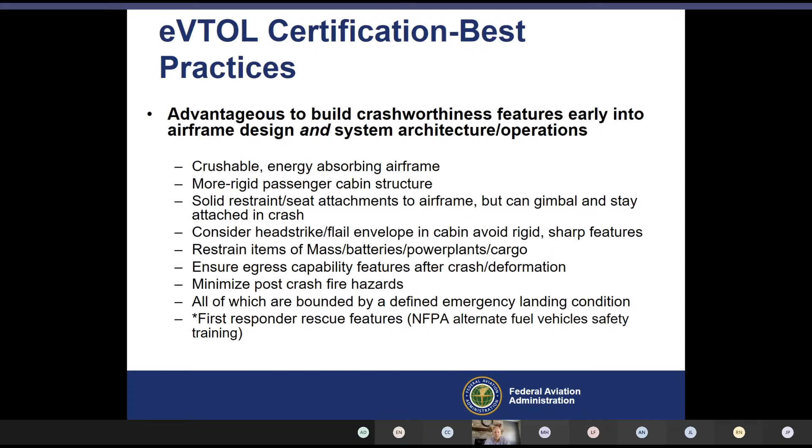Final thoughts. Obviously, we move slowly, the government moves slowly. Traditionally our cert moves ahead incrementally, and the level of safety is based upon the best knowledge we have now. That's really what we're doing with eVTOLs. It could be better, we'd like to tune it a little better and make it broader, but we are where we are.

Parts 23 and 27 are being applied. We'd like to see the failure hazard analysis, the FHA, being dragged into some crashworthiness scenarios, so we have a good idea how eVTOLs would land, and then we can work from there on crashworthiness.

I'll mention, there was a question about this before. Don't bet on eliminating crashworthiness just because your FHA hazards are really small. There will be accidents. There will be a baseline level of crashworthiness, so we can't make it go away with really small numbers.

New avenues. Other ways we could take this forward, other paths. There's the automotive path, which we discussed earlier. There's also full vehicle crashes, but we just don't build enough vehicles to do that well, as we talked about before. That'd be a great way to do this going forward. Modeling as well, modeling's moving forward pretty well.

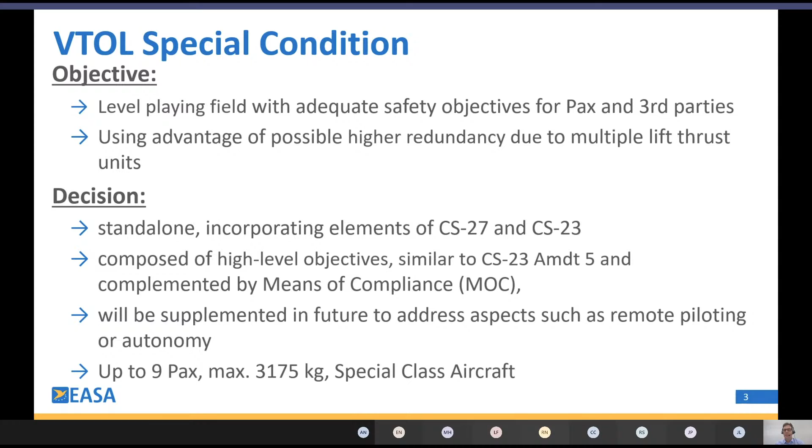It covers everything up to 9 pax and a bit more than 3 tons in a special class. So we tailored it firstly to the need there is out there now, with the option to change it later on. So where are we with our special condition and means of compliance?

The special condition was published last year, mid of 2019. And then we started to work on the means of compliance in order to help applicants comply with this performance-based, high-level objectives written in the special condition. They were presented, the first set of means of compliance, during the Rotorcraft Symposium. We took what we thought are the most important ones, and also the industry demanded what they need to know right at the beginning. So we concentrated on them.

This is public. We published them on our website mid of May for comment. We received 761 comments. We are at the moment progressing in answering all those comments, and then preparing a document addressing them, and also updating our proposed means of compliance to take into account a lot of the comments we received. End of this year, during this Rotorcraft Symposium, we will also present a second set of means of compliance, which we are currently working on, hopefully to be published sometime next year.

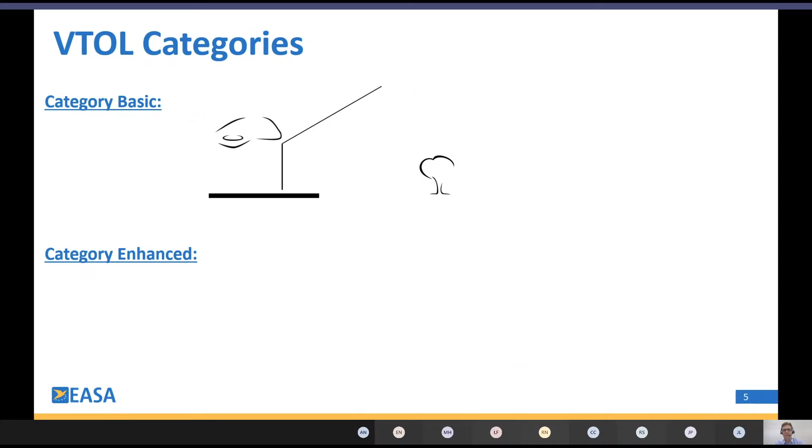So what is the overall approach of EASA? Well, we decided to have 2 categories, a basic one and an enhanced one. The basic category is operation over non-congested areas. So if you take off, fly over non-congested areas, and you have an issue during flight, then you are allowed to do a controlled emergency landing immediately. Whereas if you go for category enhanced, that's what you need if you want to operate over congested areas.

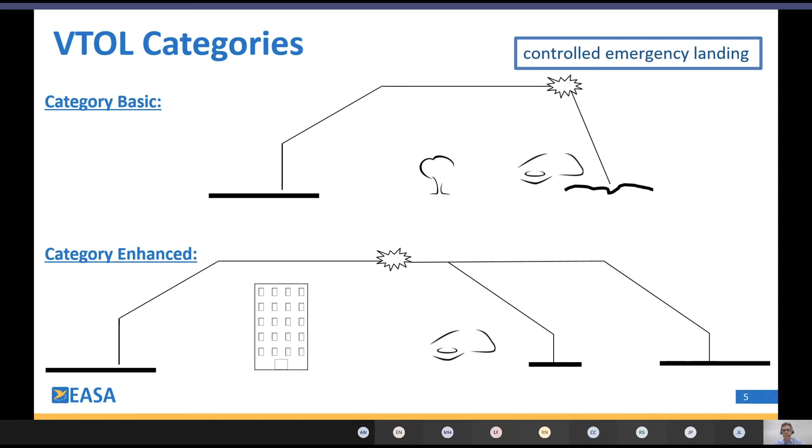You need a higher reliability. So whenever you fly over congested areas and something happens, there are 2 opportunities for what you can do. Either your system is good enough that you can go on to your final destination, or you have an alternate landing port somewhere where you can divert, but it's not acceptable to make a controlled emergency landing over a congested area.

So to wrap up the 2 safety levels: category basic is quite analogous to CS23 level 1 to 3, so the low end, traditionally called normal category aircraft, but a bit higher because new technologies like fly-by-wire are used, and you can do a controlled emergency landing. Whereas when we go to category enhanced, we moved forward doing it in accordance with CS27 Cat A, or what was known in the old days as the commuter category, CS23 level 4 aircraft. So you have to ensure continued safe flight and landing if you have any problems.

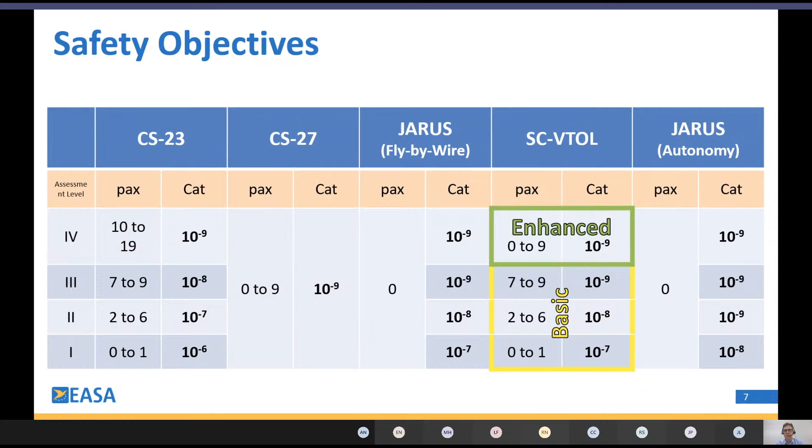So this is the rough overview of how we try to handle the special condition VTOL certification. Now going in particular a bit to the crashworthiness requirements.

In the special condition VTOL, we have 3 paragraphs that deal with crashworthiness. We have the numbers, which you might know from FAR 23 or CS 23. The 2270 emergency conditions, where it says the occupant has to be protected in case of an emergency landing. Then we have 2325 fire protection, which I'll go into further down in the presentation on post-crash fire and post-crash hazard protection. And the third is 2430 energy storage, which talks about your energy having to be retained under any survivable emergency landing. All those 3 go together into the crashworthiness requirements we currently have.

For those I'll go into more detail. The emergency landing 2270 requires protection of each occupant against serious injury when using all the safety features, experiencing the static load criteria, and it must include dynamic conditions. Also in your baggage compartment, there must be no shift of large masses, and you have to protect your flight controls and wires. That is the special condition requirement for emergency landing.

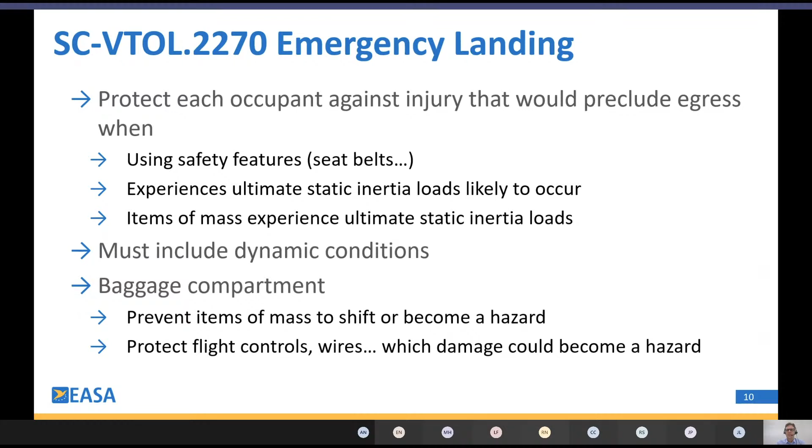The second one is fire protection. It talks a lot about minimizing the risk of fire initiation due to system failures, flammable fluids, oxygen systems, and it also incorporates minimization of fire initiation due to a survivable emergency landing. This mainly focuses later on fuel tank crashworthiness. It also talks about minimizing the risk of fire propagation, but that's not directly linked to crashworthiness, so I'll go a bit faster over this.

For our means of compliance, we took CS27 as the basis. Why? Well, the VTOL can be operated in a similar regime to a rotorcraft, with vertical takeoff and landing. But it can also be way more diverse - the speed range could be much wider than for current rotorcraft. You might have VTOLs with CTOL, conventional takeoff and landing capability, which brings more of the fixed wing world into play. But as already said by the speakers before me - do we know how they really crash? No, we don't. So we have to make a best guess, look at what we have, and go forward with that.

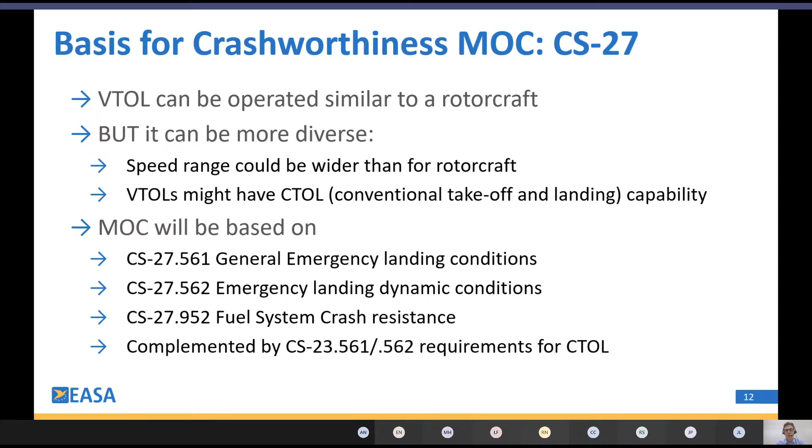In order to show how we developed this and the thoughts behind it, here's a little history of how crashworthiness was done. A lot of this came out of a report done in the 80s, where more than 1,000 rotorcraft accidents were looked at - how they crashed, at what speeds, vertical and horizontal, they crashed, and what was survivable versus not survivable. Based on that, all those 27.561, 562 rules were developed.

One of the charts I like shows on the y-axis the impact velocity in feet per second, and on the x-axis the cumulative frequency of potentially survivable crashes. Based on this, the line was put at 95%. So the static and dynamic crashworthiness requirements out of the 27 come from the idea that 95% of crashes should be covered by those static and dynamic crash conditions. There's been an additional safety layer for fuel tank crashworthiness - something around 50 feet per second, which covers more than 99%.

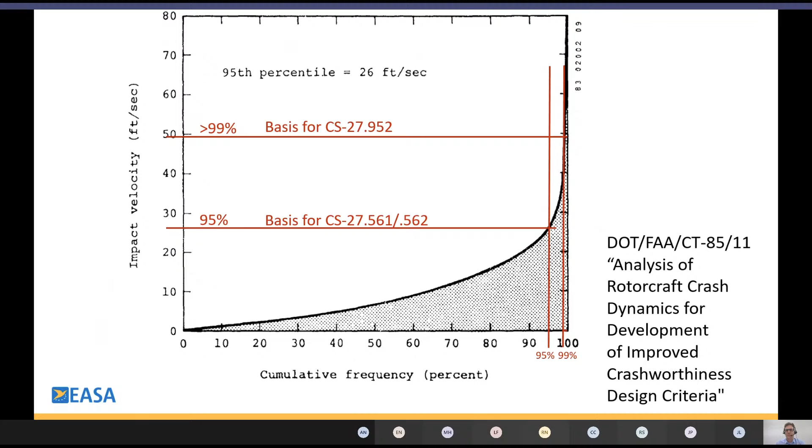To summarize those two crash scenarios, we basically have two layers of protection. There's what's also referred to as a minor emergency crash landing, with a 30 foot per second impact velocity, and the loads on the seat for rotorcraft should not exceed 30 G at the seat attachment level - that's the typical dampening structure you have underneath a helicopter. The important thing for this minor emergency landing is that the occupant must be able to evacuate themselves, so they should be protected from any serious injury which might hinder their ability to evacuate.

Whereas the second layer of protection is the 952 drop test, where you drop the fuel tank from 15.2 meters, or 50 feet.

This exceeds deliberately 99% of the impact velocity envelope, which we just seen. But this is survivable, though as an occupant you will have some injuries, maybe even severe injuries. This is mainly written to protect the occupants from any post-crash fire or post-crash hazard, so we definitely want to rule out that an occupant survives and then afterwards gets killed by any post-crash fire or hazard.

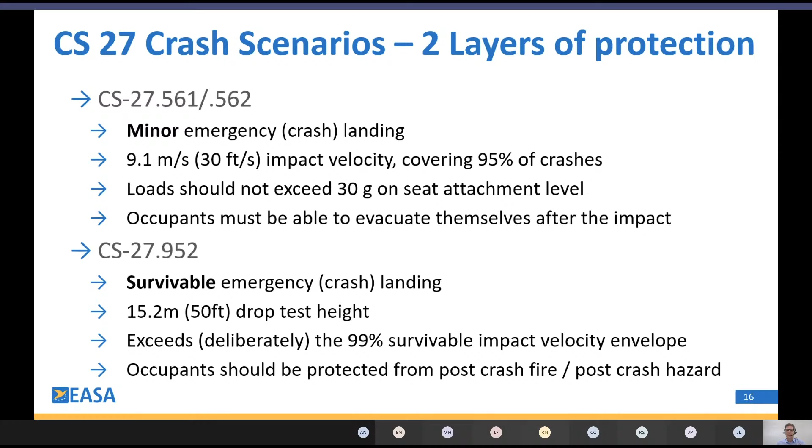So the outcome of those two layers of protection, this graph you have already seen from Bob in a bit different way, but the outcome is the same. So we take the 27561 loads. If you have CTOL capability, then we include the 18G forward instead of 16G forward. So again, you take the worst of the worst.

But this, and also for the next slide where we have the dynamic conditions, these load factors we see only as valid if the structure, especially for the vertical impact, the structure underneath the seat has equal or better dampening characteristic as a conventional rotorcraft. Because when you imagine you screw your seat on a seat rail directly on the ground without any dampening structure underneath, then the loads will be much higher.

And those 30, here it's a downward 30G, or here we see the velocities or the G loads for the dynamic seat. If we have a different dampening structure underneath the seat, this might not be a valid assumption, having the 30G. It might be more if you don't have any dampening structure underneath, or it could be even less.

So we are, even with this MOC, with the special condition, we only put a very objective-based requirement anyhow. But also this 30G downward, for example, is not written in stone. We try to get the same level of safety as you have today in the rotorcraft. So we have to somehow, out of this impact velocity that was shown in the graph before, this 30G was derived, taken into account a dampening structure underneath the seat. And this has to be also valid for new design concepts.

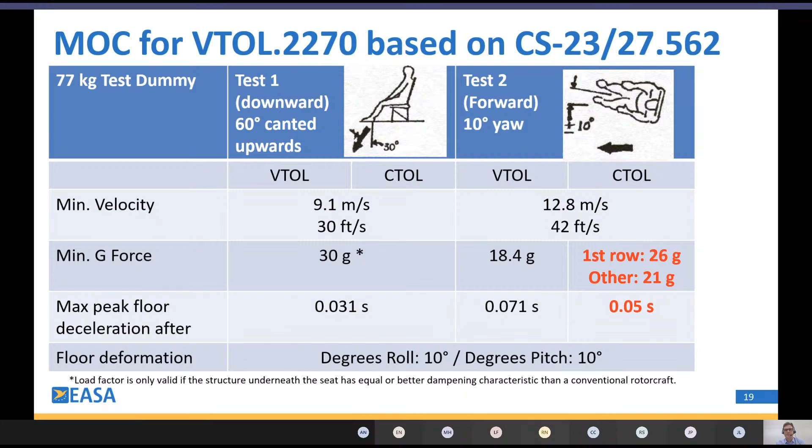Then we move on forward to the energy storage drop test. Energy storage, we use this word quite a lot in the means of compliance in order to get away from the fuel tank requirement. In VTOLs, traditionally at the moment, you don't have any fuel, you will have batteries. Maybe in future it will look different, so we try to write this drop test in general for any fuel or energy source you might have.

So it is based on the 952, which I just said, the 50-foot drop test. And the aim of this drop test is to minimize the hazard in any survivable crash landing, which is the 50-foot drop test. I tried to write it to address liquid, gaseous, and solid energy storage systems. I know that at the beginning it will be most likely the battery one which is looked at, but still I wanted to give it a wider thought.

And especially not lose the content which is currently in the fuel tank crashworthiness. And like in the fuel tank crashworthiness, you have to have self-isolation means. For electrical, it needs to be an automatic isolation means, which is requested in order for after a survivable impact, we cannot assume that any of the occupants or pilot is able to shut down the high voltage. So we request that this will be done automatically in order to protect the people when they try to escape from the vehicle, or when any rescue personnel comes and try to rescue somebody, that we don't endanger them by high voltage.

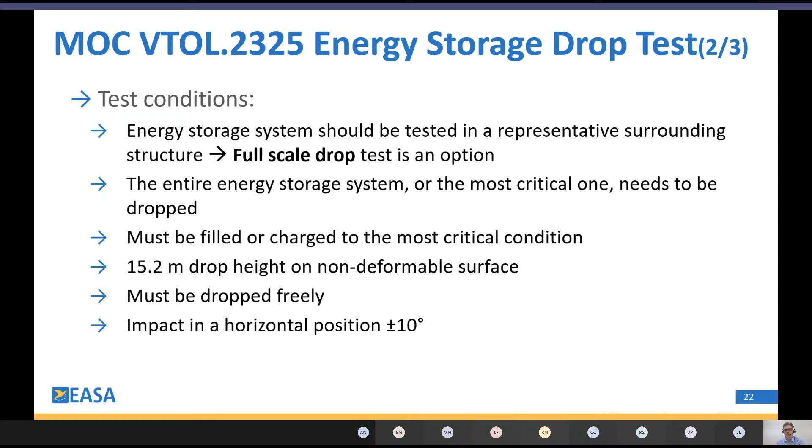For batteries, normally it's more critical if you drop them at high temperatures, so you should take this into account. You have the 15.2 meters, you drop it freely on a horizontal surface, plus or minus 10 degrees. This is pretty much taken out of the 27952 requirement.

Pass-fail criteria: for liquid or gaseous fuels, we took the pass-fail criteria directly from the 27952 - no leakage of flammable fluids or gases after the drop test. In the AMC or AC material, it's set for 15 minutes; this must be free of any leakage.

For batteries, we discussed a lot with the industry about this. When we first wrote it, my first approach was to say that structural damage should not lead to any fire, or leakage of harmful fluids, fumes, or gases. Then a lot of industry came to us and said that might be a bit difficult to achieve. So we discussed, and included a second possibility: fire or leakage of harmful fluids, fumes, or gases is allowed, but it should be contained for at least 15 minutes in a non-occupied area outside the evacuation path, in order to allow rescue personnel to arrive and rescue any occupants before the fire, fumes, or gases become a hazard.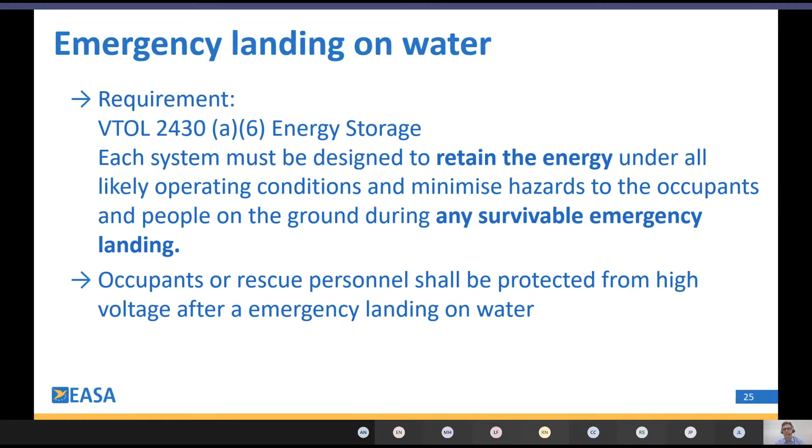So what you see now is the draft we are currently discussing internally. If you want to know more, on the 12th of November during the Rotorcraft Symposium we will present a bit more about it. But the idea we currently have is 3 layers of emergency landing on water. The ditching one and the emergency flotation one are equivalent to the one taken out of the rotorcraft requirements - it applies if you're a certain amount of minutes away from land, on hostile or non-hostile sea. Additionally, we developed a third category with limited overwater operation - this is when you are only a limited time away from land, and then you have to fulfill fewer requirements.

For crashworthiness, this means we have, as I mentioned, those two layers of protection on this curve, the 95% and 99% curve. For this limited overwater operation, we thought it might be too stringent to demand a 50-foot drop test, taking into account the limited time you're operating over water, making it more unlikely to have an emergency landing on water. So at the moment the proposal on the table is to take a 97% curve, in order to make sure that at this drop velocity there will be no release of energy or high voltage after a crash landing.

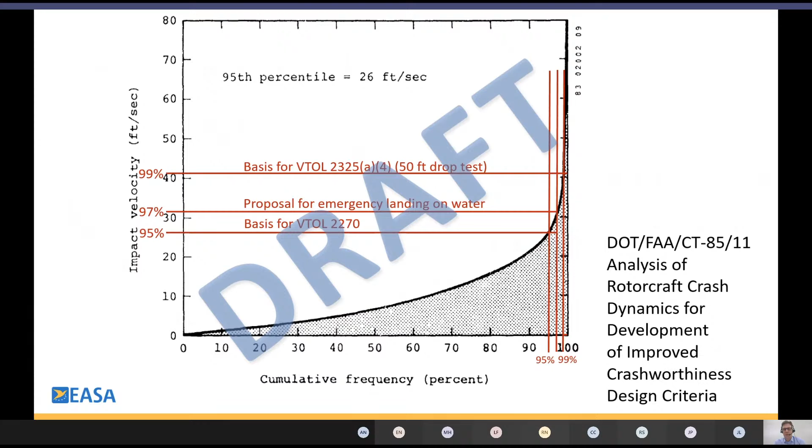In a table, it will look like this: for operation on water - ditching and emergency flotation - you do a 50-foot drop test. If you only have limited overwater operation, we are currently thinking about a 6-meter drop test height, which corresponds to this 97% curve. But remember, this is all under discussion and draft, and we will conclude on it later. If you have any thoughts about this, you're always welcome to contact us.

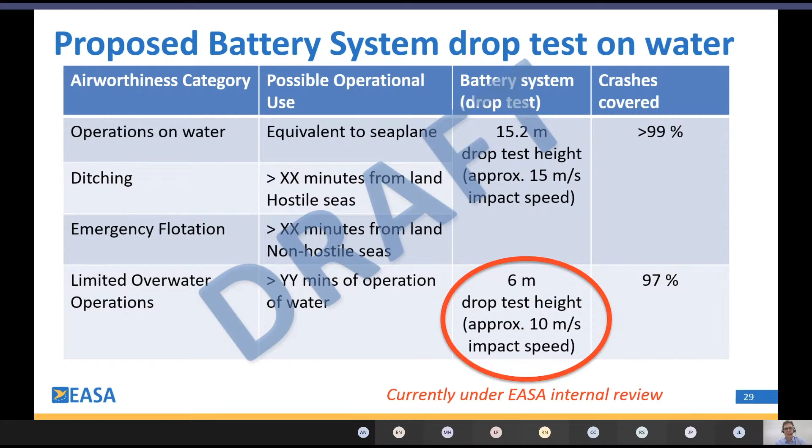And the last point I want to raise is the ballistic recovery system. It was already mentioned by Bob. Yes, we certified it for 23 aircraft, only if no suitable landing sites are available. We did it always on a no credit, no harm basis. For VTOL, we have a...

You are operating very much above congested areas, and you don't do this traditionally with CS-23 aircraft. So I also see the danger with this BRS if you use it instead of crashing also over congested areas. It's good, but if you pull it too early, or if you are too low, then it does not give you any benefit. So we will definitely not prohibit you to use it, but we have to discuss how much credit we can give for it, and how much you still have to take other things into account.

So this is it from my side. Thank you all for listening, and maybe there are some questions.

Yes, Heiko, thank you, very good presentation. There are two questions, let's see if we can get through them real quick. The first one says: new technologies like fly-by-wire serve to enhance safety by providing protection against pilot error. Why further raise the safety bar by increasing the DAL requirements for the technology that in and of itself increases safety? Isn't that an undue burden on the applicant?

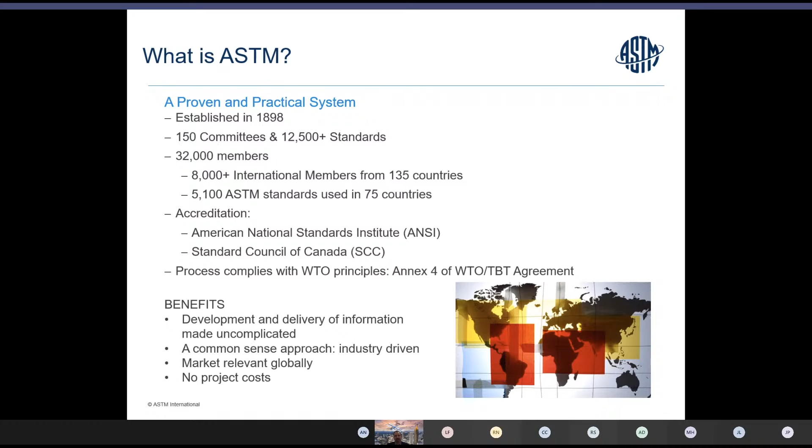What type of standards are there? There are various types. There's a company standard, where a company might put something together for an individual corporation. There are consortiums where they might be a small group of organizations or companies. There are industry standards for many companies. There are government standards, and then there are voluntary consensus standards. ASTM is in the activity of developing voluntary consensus standards.

The strength of this is that you really have representatives for all sectors that have interest in using this standard. That includes both participants that are interested in it, users that actually intend to use it, as well as manufacturers that are tending to develop products that will be used with that standard. And since they have such a broad input, a lot of the times they're considered the most technically sound, and they're often used for a basis for both commercial and regulatory action.

In the following standards in ASTM, the committees were formed for aviation. One is F-37, which concentrates on light sport aircraft, which are aircraft that have a gross weight of less than 1320 pounds unless they're an amphibian. F-38, which is unmanned aircraft systems, which really started out as something for small unmanned aircraft systems, but has actually matured to and is actually handling things that exceed Part 107 guidelines in terms of gross weight. Committee F-39 is aircraft systems. Committee F-44 is general aviation aircraft, and Committee F-46 covers aerospace personnel.

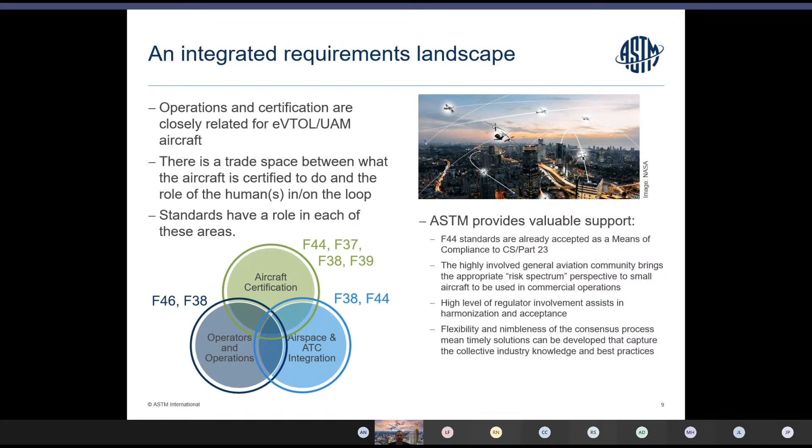In addition, in terms of actually addressing the eVTOL needs, there have been several advisory committees developed. One is AC 377, focused on autonomy, for all aspects of aviation for both small unmanned aircraft systems, as well as general aviation and unmanned aircraft. One of their recent activities was putting out a report in 2019 talking about levels of autonomy for aircraft systems based on automotive style autonomy. They're now working on guidelines for technical pillars of autonomous systems.

Another group is AC 433, and the focus of that group is to fill gaps in existing standards for both eVTOL and UAM aircraft. That was established, and the first meeting was in 2019. Really the goal of that committee is identifying and scoping gaps and then working with the different technical committees to try to fill them.

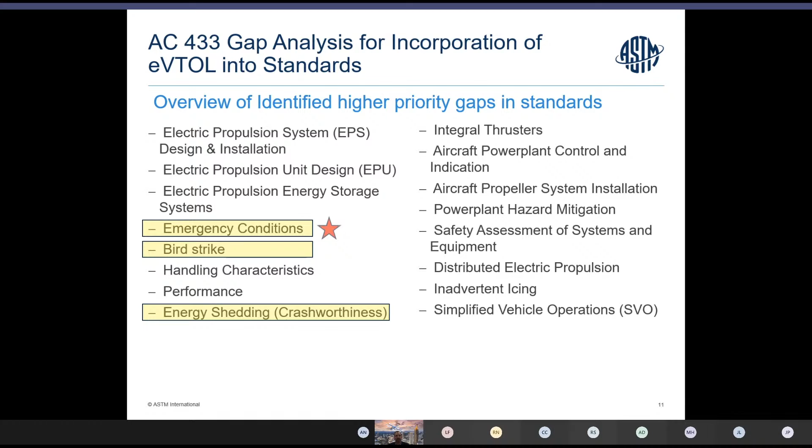In this talk, we're talking about crashworthiness. So things that would be of interest for occupant protection would be emergency conditions, bird strike, as well as energy storage. Particularly, we're looking at emergency conditions.

In terms of certification, if you have an eVTOL aircraft - and I'm going to talk about the FAA certification path - there are really two different methods to certify it: 2117A for existing classes of aircraft, and 2117B, which is special classes of aircraft. Both are essentially derived from Parts 23, 27, as well as Part 33 and 35, which are the propeller and power plant type regulations. But the difference between them is really the protocol used to certify the aircraft.

When you certify aircraft and develop a certification basis, it is often a function of risk identification, functional hazard analysis, and mitigations. When using a 2117A approach with existing Parts 23, 27, or 33 and 35, we can typically use 2116 special conditions derived from other parts or new requirements for some technologies.

If we go 2117B, we essentially have to have our entire certification basis vetted in Washington to get that approved. Again, the end result is the certification basis for the same type of aircraft should be essentially the same, because for the same configuration of aircraft and same use, you essentially have the same risks, and this should have the same type of mitigations.

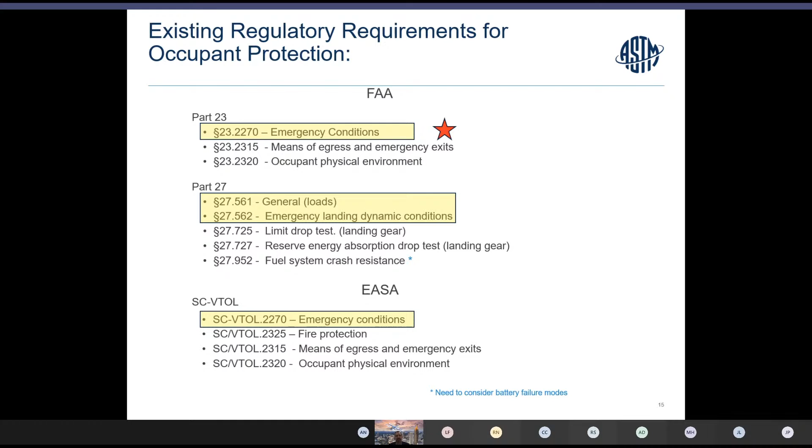Looking at them in terms of crashworthiness requirements, some of the common things we're looking at are emergency conditions. Specifically, we're going to focus on 2270, which is emergency landing conditions. When we pull up 2270, we see that the airplane has to protect the occupants for various things.

First of all, they have to have the right safety equipment on. Then you have to include both static and dynamic conditions, protecting the occupants for likely ground and emergency landing conditions. Everything must perform its intended function and not cause secondary injury to the occupant. You also have to consider baggage and cargo compartments.

One thing you notice when you look at this is that we worry about flight and ground load conditions. What are they? That's something that both the presentations from EASA and the FAA have said - we have conditions out there existing for Part 23 and Part 27. And for VTOL, what are they? That's a big question we have to ask.

The question is, are the requirements specified in 23.561 and 562 - this is amendment 62, prior to the performance-based amendment 64 - or 27.561 and 562, appropriate? Very good question. That's part of our task to determine.

Currently we have ASTM F3083, standard specification for emergency conditions and occupant safety and accommodations. When you look at that standard and its history, it was developed for fixed wing airplanes using FAA 14 CFR Part 23 requirements and guidance.

ASTM Working Group 68781 was established to evaluate the applicability of the current F3083 standard for aircraft with VTOL capabilities.

When you're developing a new standard, what do you need to consider? For landing loads, you need to ask what the landings and emergency landings will look like. Are they similar to existing aircraft or are they new? If similar, you can use conventional airplane and rotorcraft data, determine loads using historical data, and specify the loads.

If you have unique characteristics, no data exists, and you have to approximate the conditions. How do you approximate them? There are two ways: develop new loads, or use existing standards.

There's a chart some people have seen. When you look at existing conditions, they were all based on accident data. We were looking at a 95% probability of survival. Studies were overlaid to show, at the 95% survivable rate for an accident, what type of velocities we see in the impact.

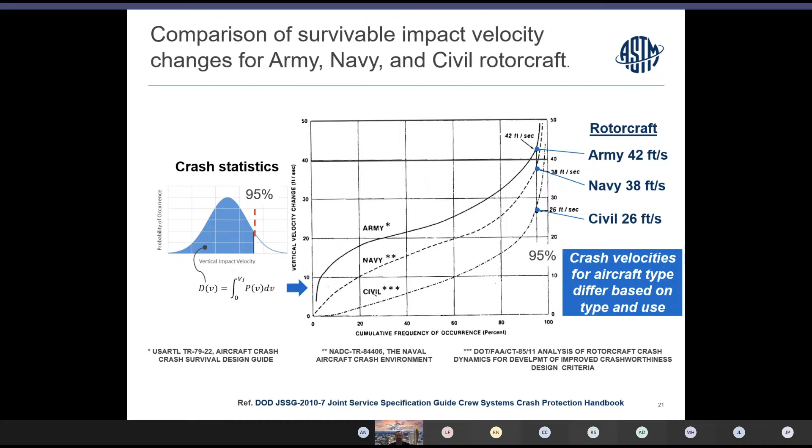There were studies for the Army, Navy, and civil sectors. For rotorcraft, the vertical descent rates range from 26 feet per second to 42 feet per second. One thing that comes from that is it doesn't matter necessarily whether it's a rotorcraft or an airplane - what matters is how you operate it.

For the static loads, one thing to consider is the current Part 23 and Part 27 rotorcraft loads. You've seen this type of data in a different format, but this points out the various differences between airplane and rotorcraft standards.

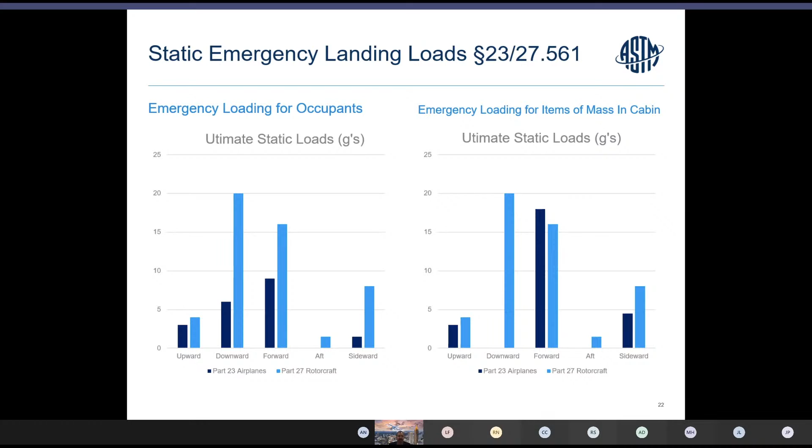For the occupants, you can see that for forward loading and downward loading, rotorcraft have a higher load criteria for passengers. For items of mass in the cabin, rotorcraft have a higher loading for downward but lower loading for forward. For items above and aft of the passenger compartment, rotorcraft have a high downward loading, but airplanes have a very high forward load required for mass retention.

One thing to be pointed out is that this came about based on certification requirements of aircraft that had engines mounted in the fuselage.

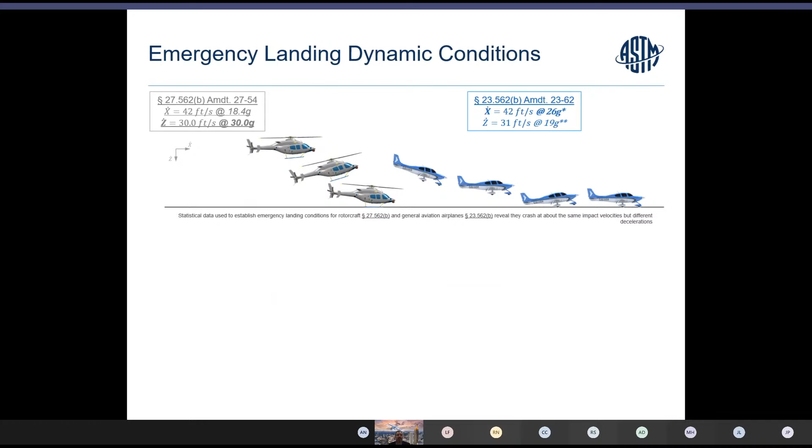Another thing to consider is dynamic landings. When you look at both helicopters and airplanes, you'll see something interesting. In Part 27 and Part 23, the longitudinal and vertical velocities are very similar. For rotorcraft, horizontal velocity is 42 feet per second, and for airplane it's 42 feet per second. Vertical velocity for rotorcraft is 30 feet per second, and for aircraft it's 31 feet per second. Not too much of a change.

When you talk about acceleration loads, you find a huge difference. For airplanes, longitudinal deceleration is a 26G requirement, but for helicopters it's 18 Gs. For airplanes, they take into account some deformation and attenuation of the structure - it's 26 Gs for the first row and 21 Gs for other rows. Same thing for vertical velocity: 19 Gs for the first row and 15 Gs for the other rows.

The question you have to ask when developing these standards is, what are eVTOL operations going to require? What are they going to look like? In urban operations, they're going to be similar to rotorcraft because of the vertical takeoff and landing necessity due to landing zones, but we don't know for sure.

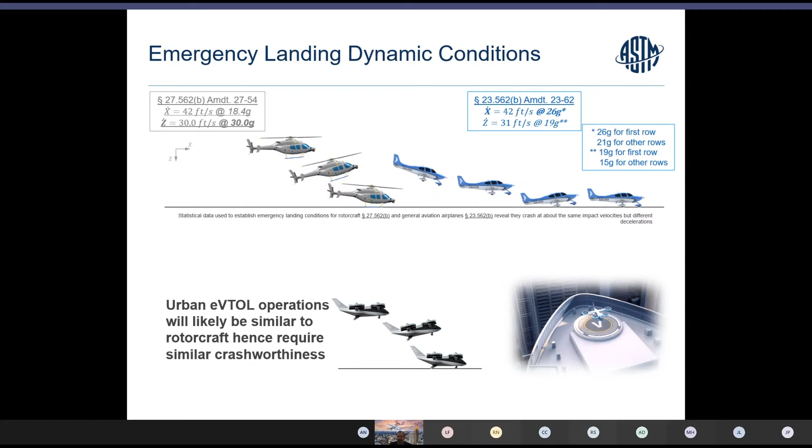We have several committees intending to provide guidance and answer questions. For occupant protection working groups, we have the 68781, which I spoke about - emergency landing conditions for eVTOL aircraft assessment, intended to investigate F3083, the standard specification for emergency conditions, occupant protection and accommodations. We also have working group 68805, bird strikes for eVTOL aircraft assessment.

And again, that's intended for F3114, the standard specification for structures. And then we've got a working group 65629, which is for energy shedding and crashworthiness. And that is to investigate F3239, standard specification for aircraft electric propulsion systems.

So there are a lot of opportunities out there, and we really would love participation from all members that are interested, both industry-wise as well as users, and especially an international flavor for everything. And with that, I'll turn it back to Joe.

Well, thank you, Eric. A nice presentation tying together where industry is helping to support where we're going. Separate from the regulatory part of it, as through the ASTM committee, are we considering a full-scale test as a possible means of compliance to demonstrate some of these concepts, or are we still following along the piece part regulations like we have now?